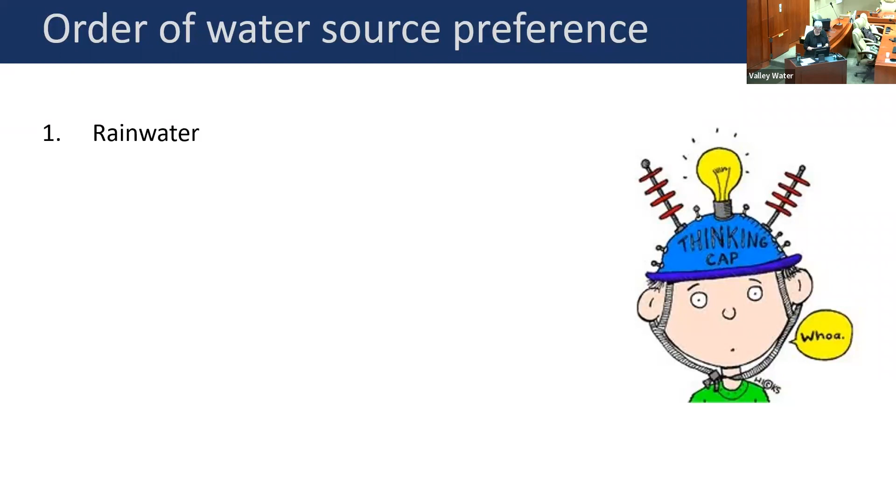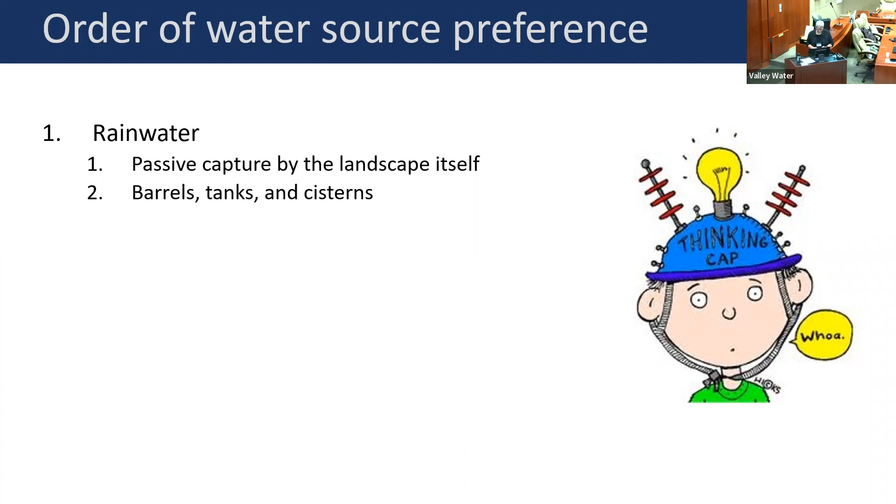Using the landscape itself to capture the water passively, and/or using barrels, tanks, and cisterns. Then our next option after rainfall—oops, hello, well these were supposed to come in one by one, but they've just eked out through the door. So the next one after rainfall, we consider rainfall first.

And then once that water's all gone, we consider recovered water from the house or the structure on the property. This would be repurposed water from the house—I know we're talking to mostly landscape professionals here, but if I were talking to homeowners, I'd say collect that warm-up water in bowls and buckets and take it outside to water plants with it. But you can also install a greywater system, or have recycled water piped in from the water purveyor, the sanitary district, or the city. And then the last resort is to use potable water.

So it's not—we're turning this whole paradigm on its head of what we're used to doing. We just turn on the tap and there's the irrigation, all right? So I'm asking you to think about it in a different order now.

And that potable water is whether it's piped in by the public water system or a well on the property.

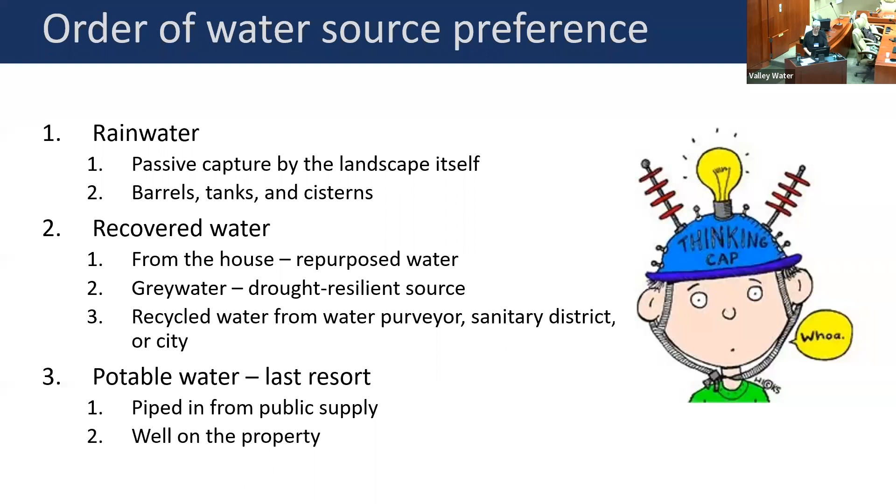So with rain and plant water requirement, they're both measured in inches, which makes it easy to put them both onto a bar chart and compare them. I don't know if you've ever seen anything like this before, but once I started doing this, I thought, wow, this is so cool.

I live in Richmond, California, and ever since 2007 I've monitored practically every drop of rain that falls anywhere near me. I do that because I'm a landscape water manager, or I was for many years. I see Chad smiling and nodding back there—he's a water manager also. So I tracked the annual rainfall from 2007 to 2021. Actually 2022's water year could be on here, but it's not, and it's right about the same as 2021 was.

So what I did was put the inches of rainfall there, and then I superimposed the plant water requirement for high water, moderate water, and low water plants—their inches of plant water requirement.

And then that purple line beneath the green line, that low water with mulch, comes from a study done at Texas A&M University where they found that just 1 inch of mulch spread over a landscape area lowers the plant water requirement by 25%. This is big, and I've even heard bigger numbers than that. I think 25% is very reasonable, and it feels a little low to me, but it makes me feel more comfortable to say yes, 1 inch of mulch will lower the plant water requirement by 25%.

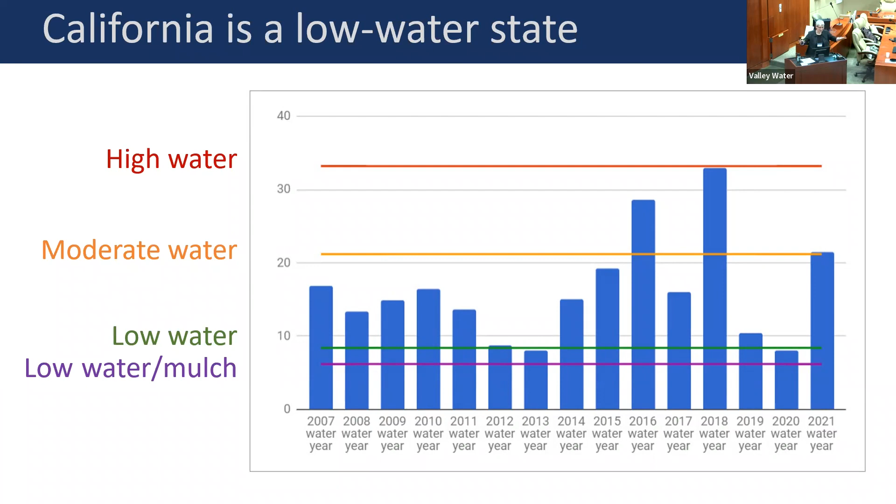So if we are going to go into the future and use less water, we need to use low water plants in our landscape.

All right, so here I've done the same thing, only I've plotted it out over the course of 12 months instead of 15 years. Hey, good one back there—I hate when that happens.

So I've plotted it out from January through December, and it's the same thing. These are historical rainfall totals from a website called usclimatedata.com, and this is historical rainfall for San Jose, California for January through December. Then I plotted on there the high, moderate, and low water use plants in this area. So there are a few things I'd like to point out about this.

If we look at the high water plant water requirement first, we can see that only in November, December, January, and February would rainfall take care of high water plants. So that's only 4 months out of the year.

For moderate water plants, we have November, December, January, February, and March—so we've got 5 months out of the year.

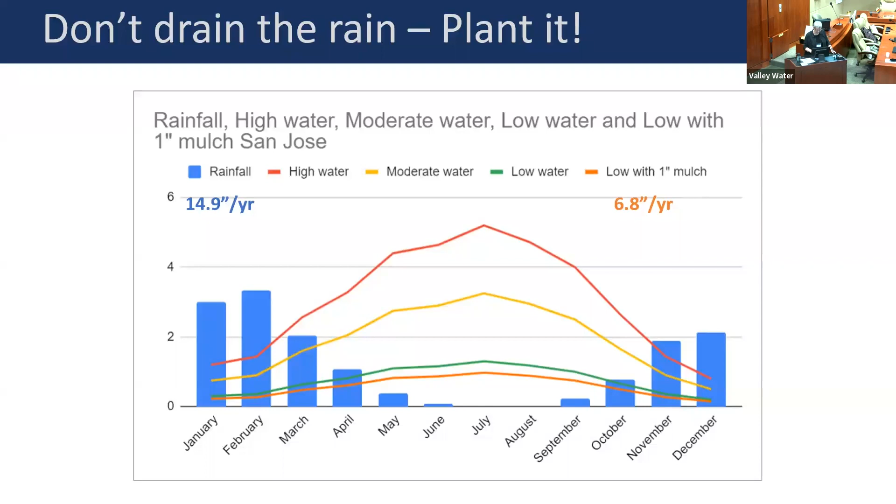Then we move on to that next option, which is greywater from the house or structure. Alan will be talking about this in his talk after mine, and Peter will be talking about stormwater as well. All right, so then the next one here.

Now, with this slide, I wanted to show you that it's pretty much the same story even if you go south of San Jose. It's an even better story when you go north of San Jose. But when you start traveling south, it's pretty much the same story. So I've taken 4 different cities here and did the same plotting: Merced, Riverside, San Diego, and Palm Springs.

At the top left, I have the average inches of rainfall per year. And at the top right for each city is the average annual water use requirement of low water plants.

Now, what I found when I started plotting these—and I've done about close to 20 of these around California—is that if the annual historical rainfall in inches is higher than the plant water requirement in inches, then in those places, they can leverage that free water that falls from the sky well into the summer. In some places, it's all the way through the summer.

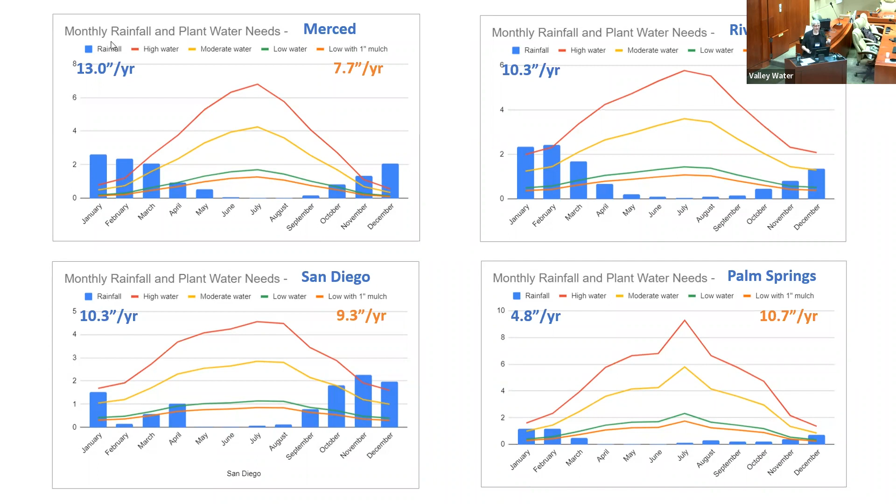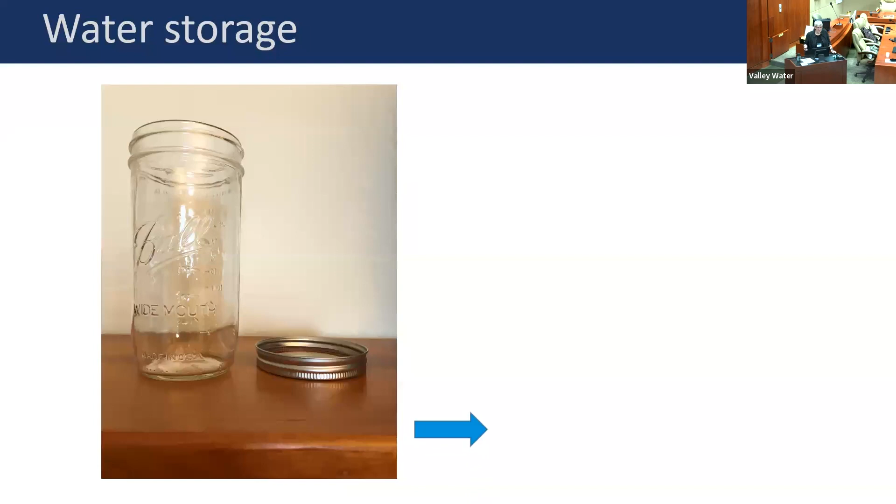Well, when you want to store water, or any liquid for that matter, what you do is you get a container. In this case it's a jar, and the jar has a lid. So you take that jar, pour water in it, put the lid on the top, and you are storing water, okay? You put a lid on it.

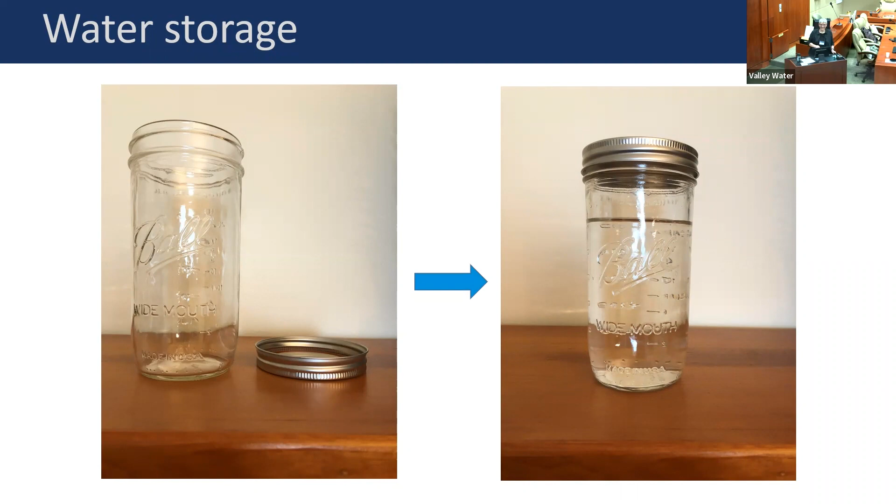Well, my friends, mulch is the lid of the landscape. I'm going to repeat that: mulch is the lid on the landscape. Now remember, I told you that mulch cuts down on or lowers the plant water requirement by 25%. So that is the way to hold it in for much longer and make it last as far into the summer, or through the summer.

As you're going to find out from Peter, we don't really just take that roof water and send it right out to the storm drain as quickly as possible, like we used to. We need that water in the landscape. We want to create a living sponge of our landscape and hold on to that water. So we can do really aesthetically pleasing things with the landscape itself to hold on to the water, like dry stream beds, rain gardens, and swales, etc.

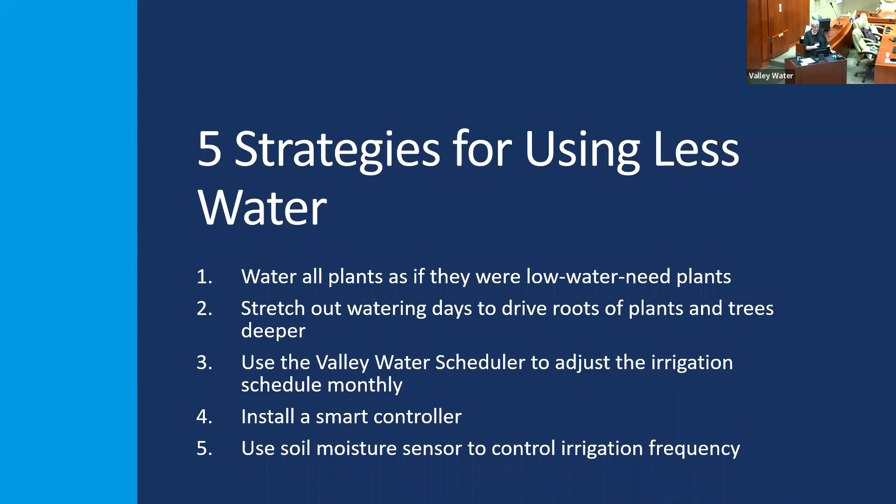So here we go. Now, water all plants as low water plants. This is my mom's front yard. When I planted this for her, I wasn't a water efficient landscaper yet, I was a pretty plant landscaper. So I put in all the pretty plants I could find out there in Rio Vista, California, ones that could take the really harsh, brutal wind they get out there almost 24/7.

So this is... let me see that, because you have to give the area... yeah. In this suggestion, this strategy, what I would say is to take this whole area, and this is an irrigation zone that we have here.

If you're using the most efficient irrigation we have, it's drip. And the most efficient drip is line source drip or grids, because it waters 100% of the soil. So if you were watering this, or even if you were using sprinklers—which you really shouldn't be using on planted areas, and in fact you can't do that per our landscape ordinance...

If you're watering it uniformly, you'd have to water to the higher water use plant in this irrigation zone. This is a really common scenario, where we have low and moderate water plants mixed. The moderate water plants are getting watered properly, they're happy. But then the low water plants are getting twice the amount of water they require. FYI, in case you don't know, moderate water plants need half the amount of water that high water plants need, and low water plants need a quarter the amount that high water plants need. So this is very much not recommended.

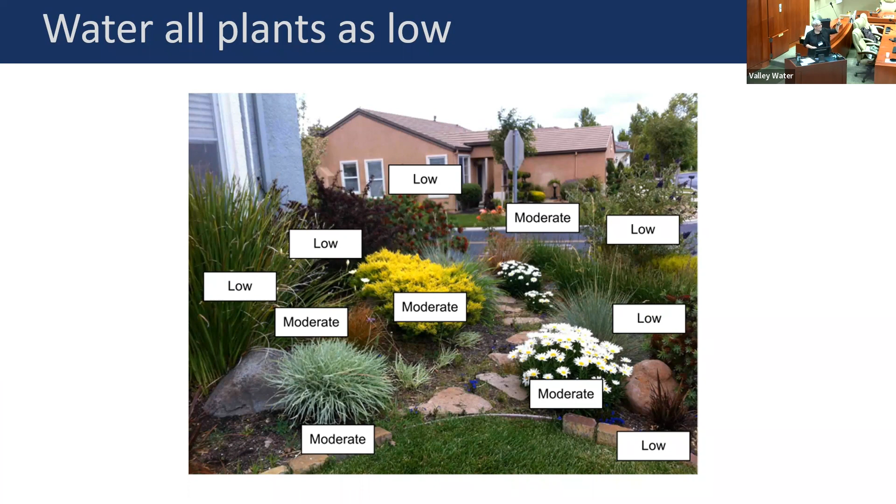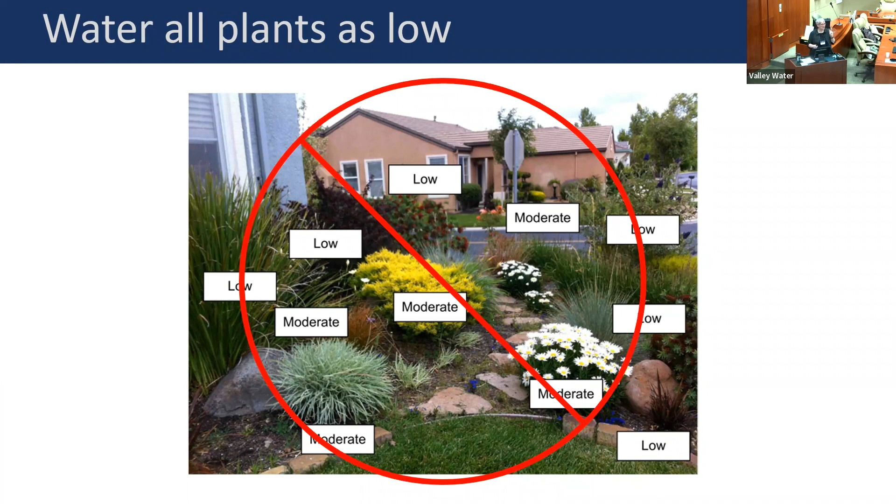So in this case, with this strategy, I would recommend running this irrigation zone as low water plants. Oh, and by the way, don't do this—we don't want our irrigation zones to have 2 water uses, and especially not 3.

So how much water do plants need anyway? Do you know how much water plants need? If you and I were standing in front of a street tree that you planted 2 years ago, and I asked you how much water this tree needs per week, would you know? No, you wouldn't. We don't know how much water anything needs, because it depends on what city you're in, it depends on the size of the plant, whether it's low, moderate, or high water use, and the square footage of the planted area. There are many elements that go into determining how much water anything needs in terms of gallons.

So I developed this app here. A lot of you know that I'm an irrigation geek and a technology geek. I develop apps—I've developed about 23 of them now, apps and websites that are out there in public. And this is one of them.

With this one, for any plant in any incorporated city in California, in any time frame, any plant material, and various sizes of plants and planted areas, you can look up how many gallons that plant needs—because sometimes we have to water things by hand. If you're counseling homeowners to use water from the house, like their warm-up water, they need to know how many gallons a week that street tree needs if they're going to water it by hand. So this is one way to know that.

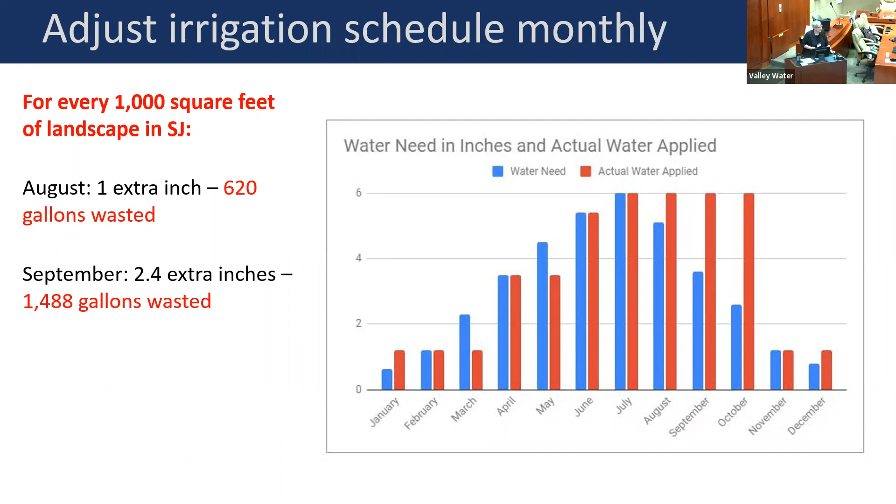So how much water are we even talking about? In San Jose, California, for every 1,000 square feet of landscape with this scheduling practice: in August it's an extra inch, 620 gallons wasted; in September, 2.4 extra inches, 1,488 gallons wasted; and in October, 3.5 inches, 2,170 gallons wasted — a total of 4,278 gallons wasted over these three months. Remember, this is just 1,000 square feet in somebody's yard.

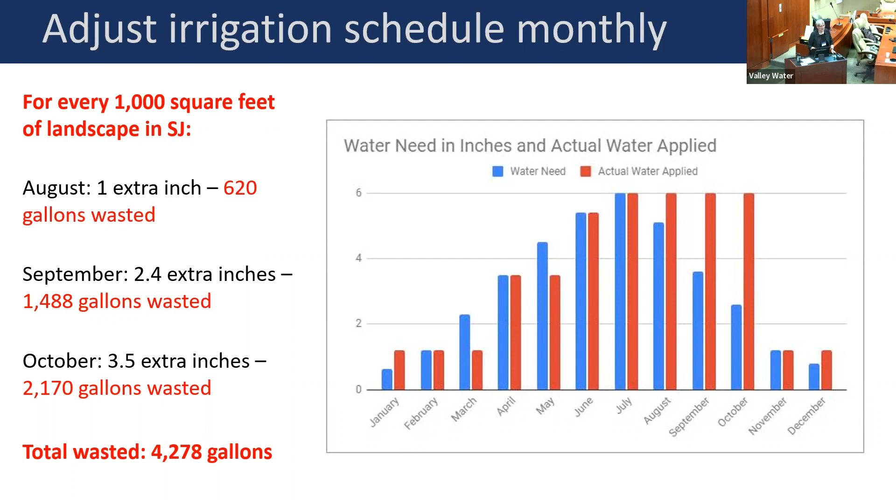What happens when that goes out to blocks, neighborhoods, and cities? This compounds itself, so it's really very important to change your irrigation schedule monthly at the very least.

The last strategy I have is to use soil moisture sensors. The biggest irrigation manufacturers whose components we use in the Bay Area — Rain Bird, Hunter, and Toro — all have a soil moisture sensor you can hook up to any controller, not just that brand. What it does is deny irrigation from happening until the soil is dry enough to need it.

So what I like to recommend is that if you don't have experience with any of these, install one at your house so you can see how it works and get a feel for it. A big light bulb moment will go off in your head: oh my gosh, water stays in the soil way longer than I thought it would.

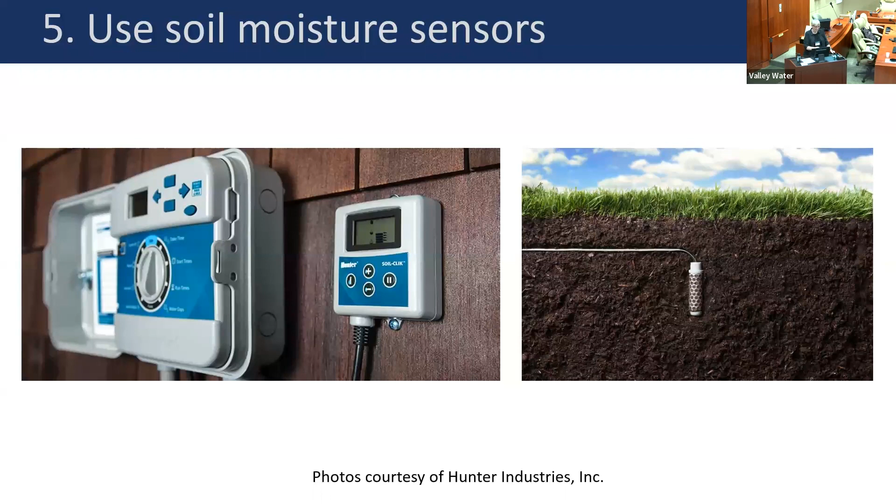Okay, so this would give you an education. And if you hook it up to your controllers, let it deny the irrigation from happening unless irrigation is needed by the soil, because we're watering the soil, not the plants. When the soil says, hey, I'm dry enough and allows the irrigation, then we allow the irrigation. So just a little tiny closing here: I hope I've filled your head with lots of great ideas and inspired a mindset that propels you to create and maintain landscapes that use very little water.

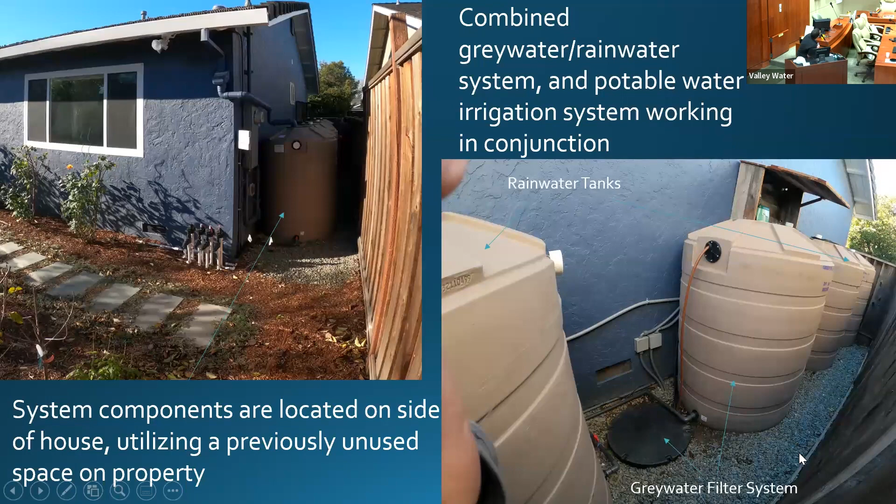So basically here's our little, the 2 bathrooms, and they're collecting water from showers and sinks and our laundry machine, and they're flowing to the tank, which you saw in this picture earlier. So this is that tank that's in the schematic, and all the fixtures are flowing to that tank on the side of the house.

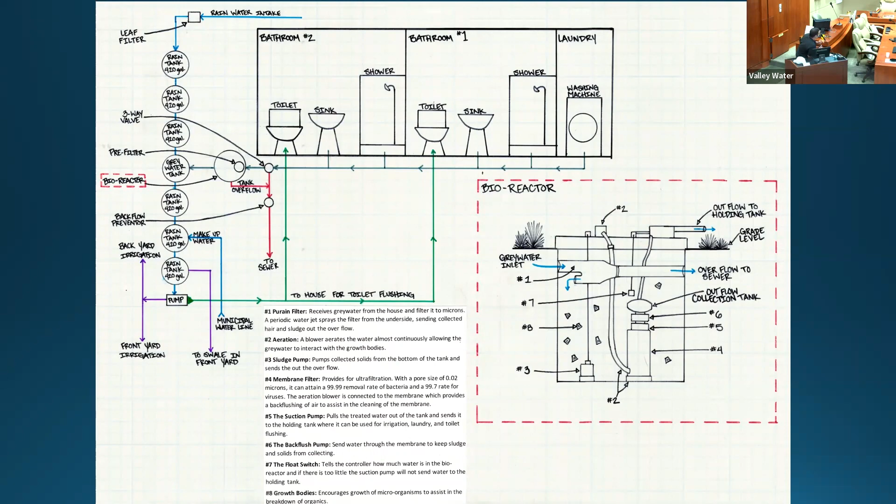This is kind of the brains of the system. This is where the filter and the pump are located. And once the water is filtered, I'm going to jump around the slides a lot. I do apologize, but there's a lot of information to cover, so I'm trying to do my best to convey without using too much jargon here. Let me get to the next slide.

Okay, so here is the actual schematic of that tank. In that tank, the water will flow from those bathrooms. It's going to go through this little pre-filter, and then it will sit in the tank. This is where our pump and secondary membrane filter are located.

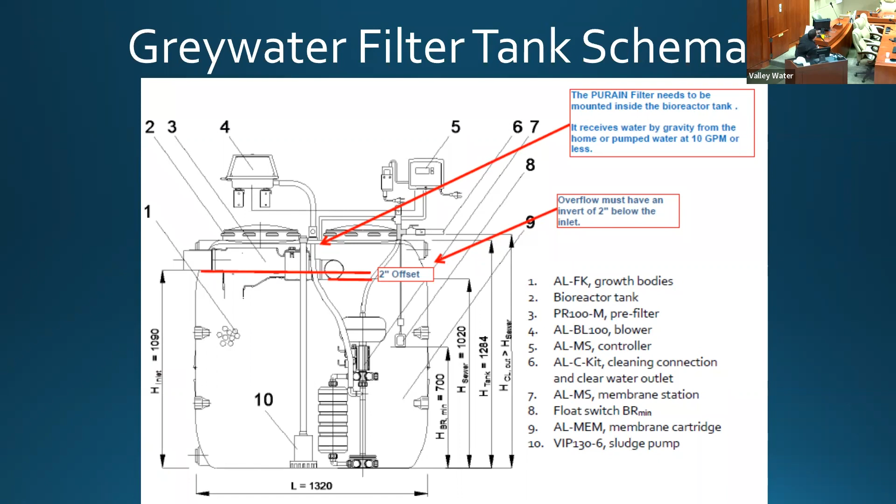And so the way this system works, you have three stages of filtration.

So the first stage is our Purain pre-filter. This is designed to catch the largest debris, hair, shaving stubble, shaving cream, toothpaste. Those are some of the biggest things that get caught up in your filter for a greywater system. So this is going to catch that larger debris, that kind of gunk. If you've ever seen a greywater tank, they get kind of funky.

This is what gets that initial debris out of the system. Once it's gone through the Purain filter, the water will fall down this little section right here and then drop into the tank. So this side is our inlet.

This is our check valve. What the check valve does, if there's ever a sewer blockage further down the line from the street, the sewage water can't flow back into your greywater tank. And so this little check valve has a little access port on top. Once it goes through the filter, it's going to come down the vertical outlet and into your tank. That's our first step in this process.

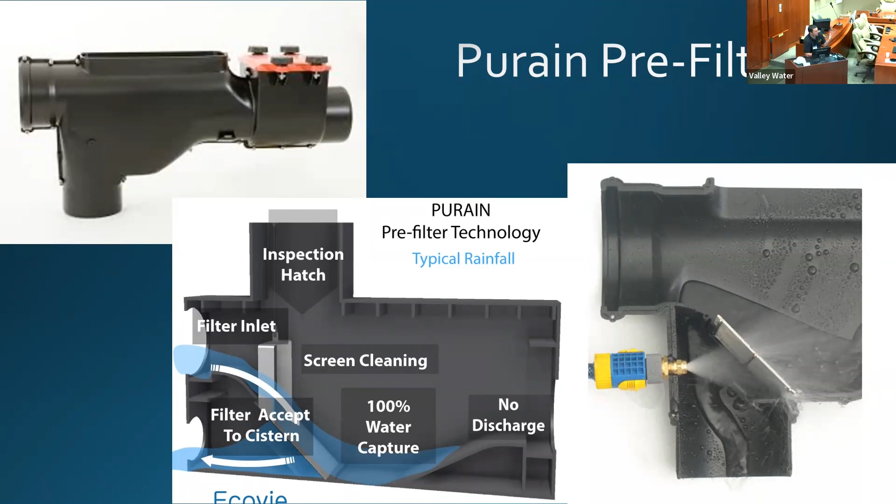So the secondary process is our membrane filter. This filter is going to catch all the smaller debris, basically small organic matter, whatever's in the soap product you're using. And once it goes through the membrane filter...

So the actual tank itself is a 35-gallon tank, made out of polyethylene. It's 18-inch diameter and 30 inches deep, basically the size of a small garbage can.

And if you look at this little media here on the side, these are basically little plastic balls, and they are designed to house the beneficial microbes. Those beneficial microbes are what's going to break down the final layer of organic material inside the greywater. And you can see there's kind of little bubbles in here.

The system has a pump that basically pumps oxygen into this tank. So the oxygen is what's keeping all those beneficial microbes alive, and those microbes are able to break down the greywater material.

If any of you have ever been next to a greywater tank or any kind of sewage, even opened up a 2-inch drain on this, they get disgusting really quickly. So the oxygen is what keeps the tank aerobic, not letting it go anaerobic, and it allows the microbes to do their job and break down the greywater.

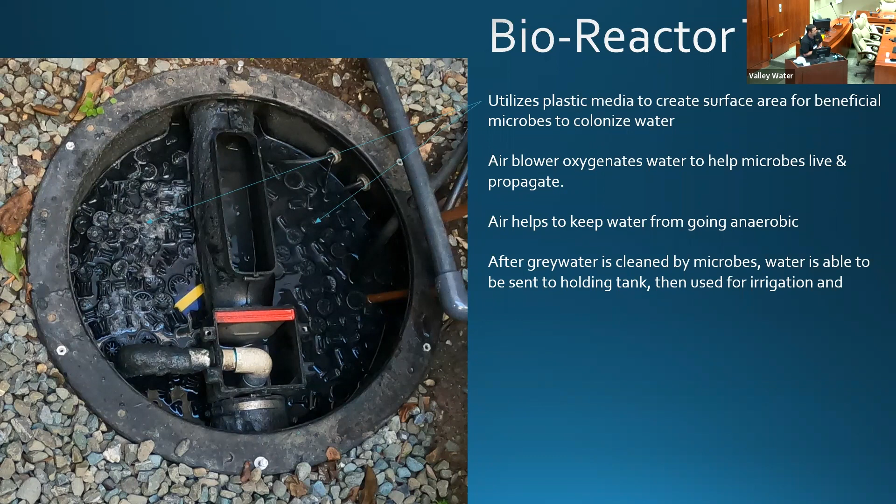So yeah, so here's, once it's gone through the filter, actually, let me go back one slide. Maybe it's one more slide forward. Where do I have? I thought I had. I'm so sorry.

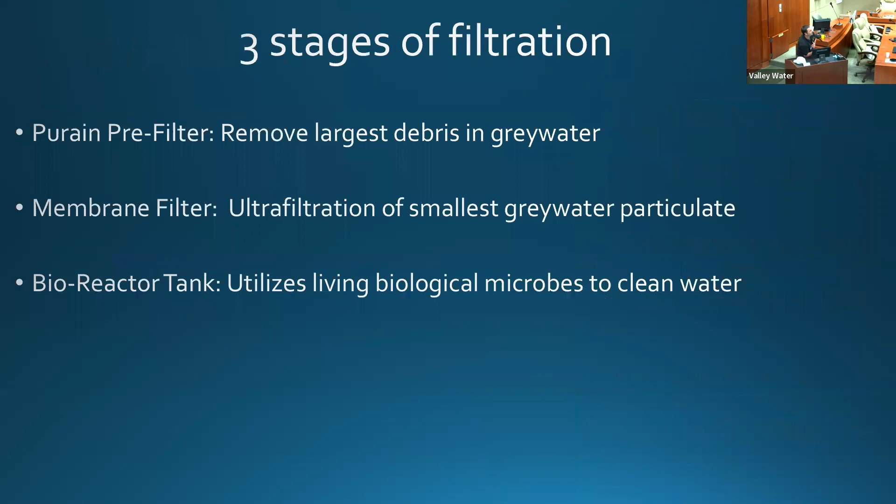Okay, so let me go back here. So the water will come from the house right through here.

It's a buried 2-inch ABS pipe coming from the bathroom, showers and laundry. Once it goes through this bioreactor, you can see right here this little yellow guy, there's a float switch that tells the controller when the water is full and to send it out to the storage tank. This little brown pipe is the outlet pipe from the pump at the bottom.

Once it's had a chance to sit in the tank for 24 hours, that's enough time for the biological activity to happen, and the water is now clean enough to be stored. Then it sends that water via this half-inch line.

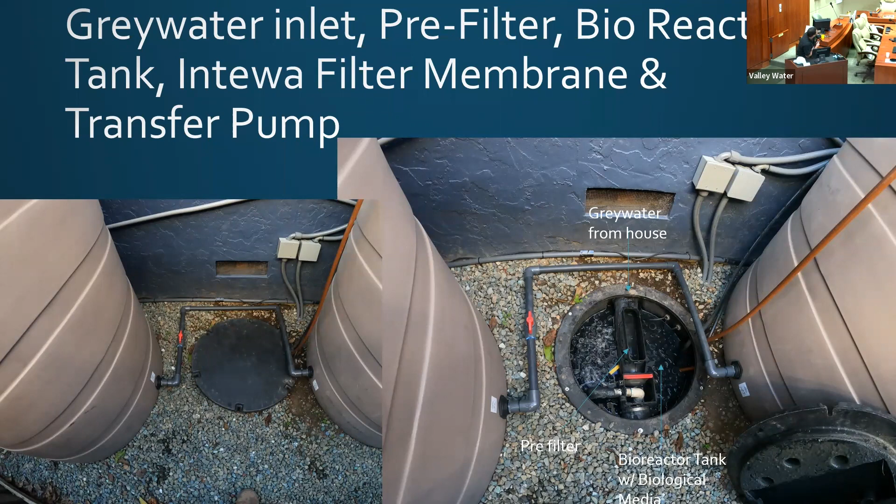It's actually a blank Netafim line, so it's got some flex to it, which makes it easier to install. Once it's gone through the filtration, it can now be stored in these 420 gallon Bushman tanks. That's this guy right here.

This particular project had 6 Bushman tanks on the side of the house, 5 of them for rainwater storage, and 1 for greywater storage.

In most cases, you would never be able to store this greywater—that water would go anaerobic basically overnight. So this is one of the benefits of doing this: it allows you to really fine tune your irrigation schedule.

Most greywater systems have an irrigation schedule dependent on when greywater is available, so in most instances, every time you take a shower or run laundry, that's when you're irrigating your landscape. Being able to store it, you could run your irrigation based on whatever water-efficient irrigation techniques, like some of the ones Lori was mentioning. So you have the flexibility of when and how long you water by being able to store it. This really opens up a ton of options for how you can use greywater.

Based on the amount of space and people in the home, you could have a larger or smaller tank. So you kind of size it based on the water being produced.

In this instance, they have a family of 4—2 of the kids are there part-time and come and go, so they're not there full-time. If it were 4 permanent household members, I would maybe go to a 600 or 800 gallon tank. So every case is going to be a little different depending on space and occupants.

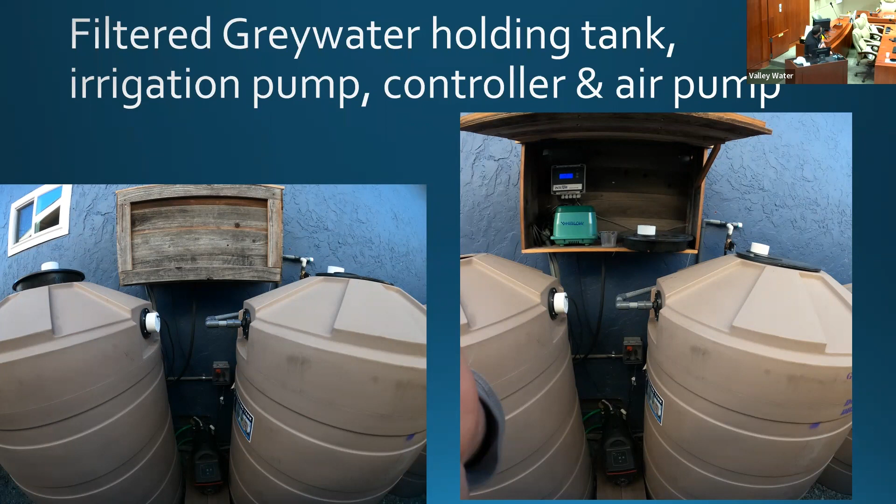Okay, so let's go to the next slide.

Here's just a close-up of the controller, and you can go through a bunch of different options that tell you what the water flow is, what your irrigation usage is, if the float meter is reading properly, if the potable water connection is active. So this is just giving you up-to-date stats on what's happening in the system.

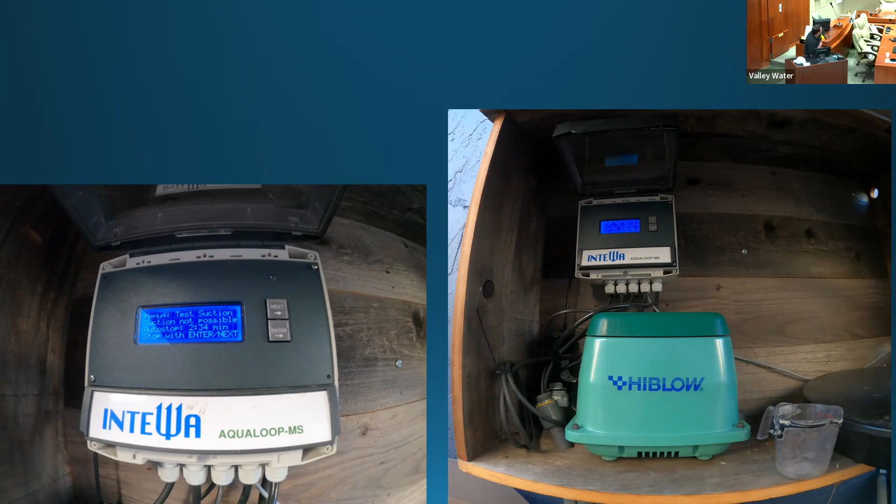This part is our on-demand pump—a 1/2 horsepower Grundfos on-demand pump. What this pump does is its goal is to always hold the water line under pressure, and it will only kick on when it notices an irrigation valve turn on.

What's good about this particular pump is it doesn't require a bunch of additional sensors mounted inside the tank to tell it when it needs water. It's a very advanced pump, but it runs in a very simple fashion—it just monitors when there's a drop in pressure. Every time an irrigation valve kicks on, this pump will turn on and send water out to the landscape based on the Hunter controller. This particular project uses a Hunter controller.

This is going to send water to our indoor non-potable system, for toilet flushing and for laundry. You can see right here this is a 1/2-inch PEX line, and that line is plumbed to 2 toilets indoors and also for the laundry.

Even though this system can be used for laundry, I wasn't able to convince the client to have enough confidence in the system to wash their laundry with it. I'm hoping as they see the system used long enough, they'll have more confidence. But that's okay—there's always a process to getting people to adopt these systems. It is an option you can use for laundry usage.

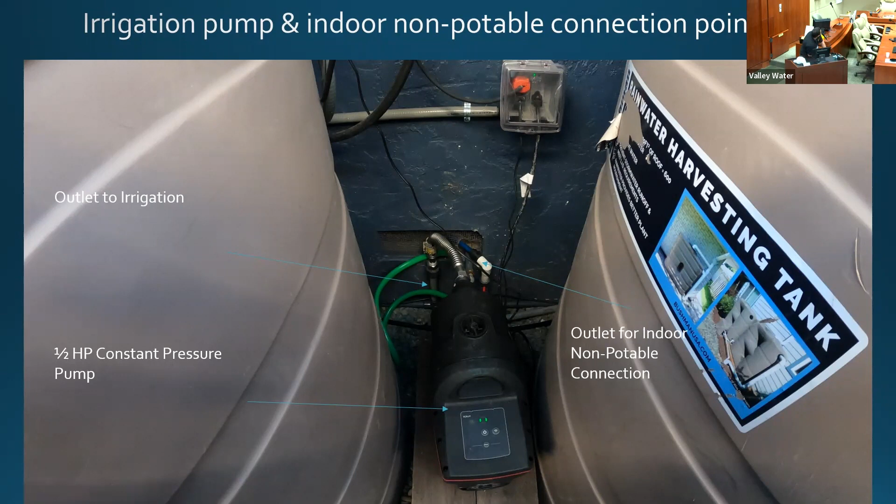So if there were ever an incident where there's no power, the pump wouldn't work outside and you wouldn't be able to flush your toilets. If that scenario ever happened, you can simply unplug the line coming from the greywater system and plug it back into the municipal supply. So you're never going to be left without the ability to flush a toilet—it's kind of a little backup supply.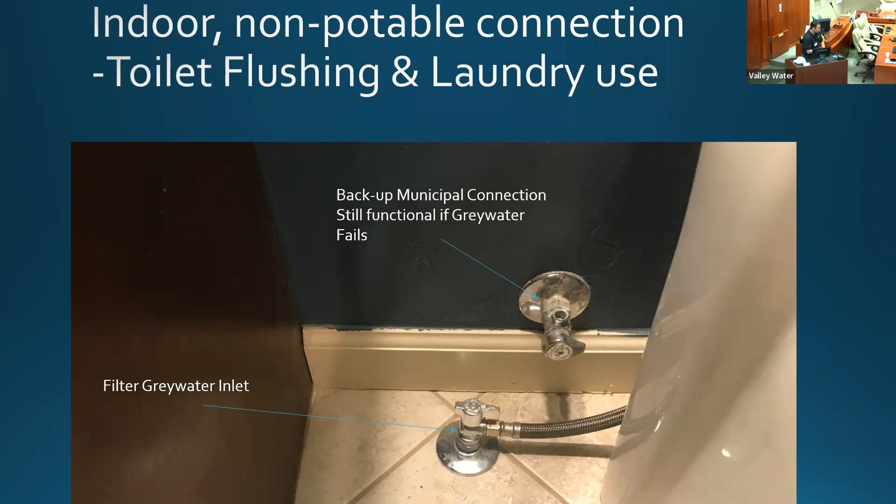So basically the whole system is always going to still be dependent on that one pump. Whenever there's a lack of water, it'll fill up—there's always one tank which is sort of our working tank, and that's what's always controlling the water to the irrigation. So if there's a lack of water, it'll fill up the tank just high enough to satisfy one irrigation cycle, adding anywhere from 100 to 200 gallons, then turn off and wait until there's either gray water, or if there's still not gray water being produced, it'll rely back on the potable water.

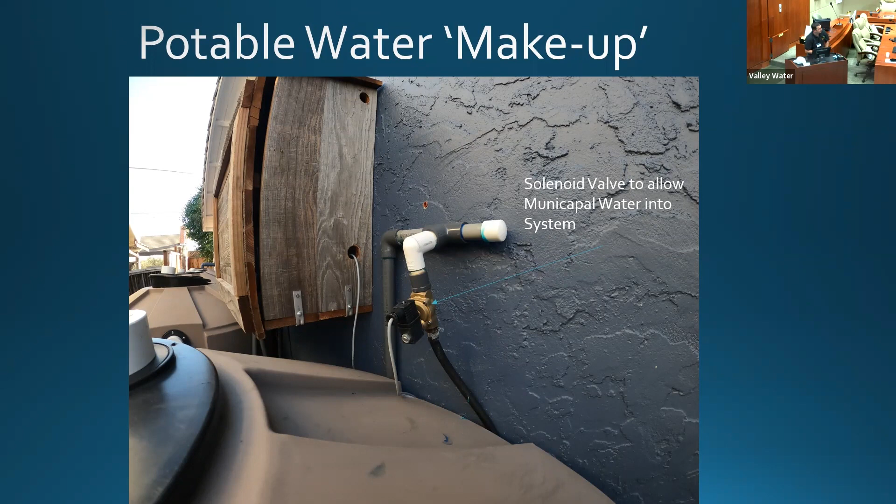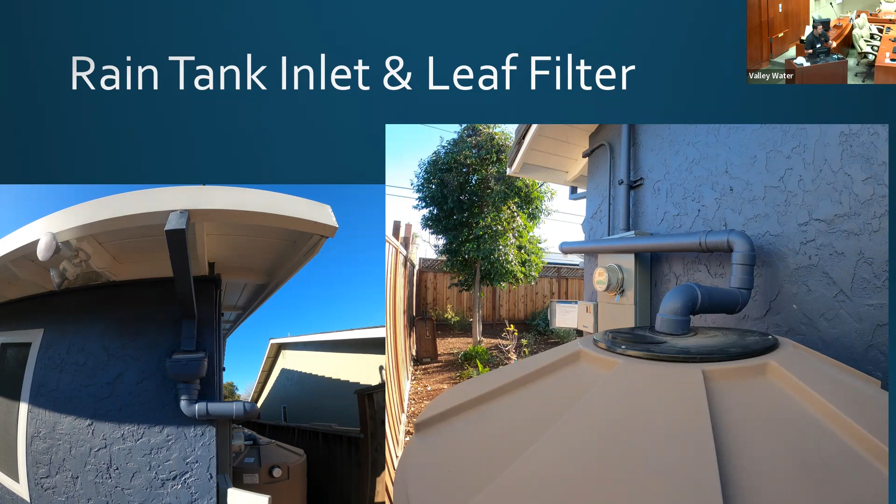I'm sure everyone's probably seen these—this is just where the rainwater connection is. The way this system works, it's always going to take gray water first as its priority for water usage, just because it's being produced daily, so it's always going to want to catch and use that water first. Since rainwater is more intermittent, it'll use rainwater as a secondary source, and third will be potable. So it's kind of the hierarchy of water use for this system.

The beauty of this system—I'm not sure how much experience everyone has with different manufactured gray water systems out there, but I think one of the biggest challenges is so many of the products are proprietary products or proprietary controllers. They're one-off systems, so every time you install one you have to use their product, and there's not a lot of uniformity. If there's a problem with the system, it's hard to get parts, and they're expensive. The beauty of this system is you can use a lot of off-the-shelf parts that you can find at any landscape supply store, so I think that's a really big plus to this kind of system.

This particular system runs off just a simple Hunter Pro-HC controller with a Hydrawise configuration. I think the more off-the-shelf parts you can use, the bigger selling point it's going to be to your homeowners.

One, it keeps costs down, and it's easier for them to replace. Many times when we put these systems in, we do maintenance, sometimes they have someone else doing the maintenance. So if I can make the system easier for whoever's doing the maintenance to understand and use, it's just a plus.

This garden runs off of just a simple Netafim Techline RW for reclaimed water. You don't need to use this, you could use a simple Techline CV. We went with the RW just because it has the purple stripe, just to make sure it's clear to anyone in the future to know that this system is running a greywater system. But you could use any Netafim product or any inline type drip product, a Hunter or Rainbird would work just as well.

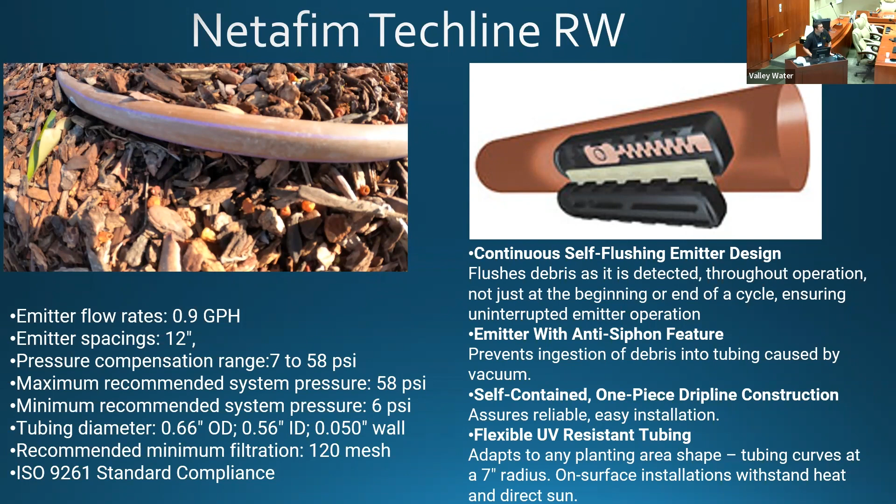So some of the benefits of this system, the main maintenance is cleaning out the little membrane filter. I know it's funny because this is like a high-tech system and the filter just looks like a ball of yarn wrapped around a piece of metal. But the beauty of this is it creates as many surface areas as possible to catch that grey water, so even though it looks like a homemade setup, it actually works fantastically well.

The maintenance on this really depends on how many people are living in a house. I always say there's a 1-to-1 ratio of length of hair to how often it needs to be cleaned, and that's not a slight on long hair, I used to have long hair myself, but the longer the hair, the more this thing gets caught up with things. So maybe a 2 to 3 month kind of time period between washing this. You can just pull it out, use it with a simple power washer, wash it every once in a while. You want to do like a bleach dunk to really get some of that grime off there. But besides that, that's sort of the extent of the maintenance of the system.

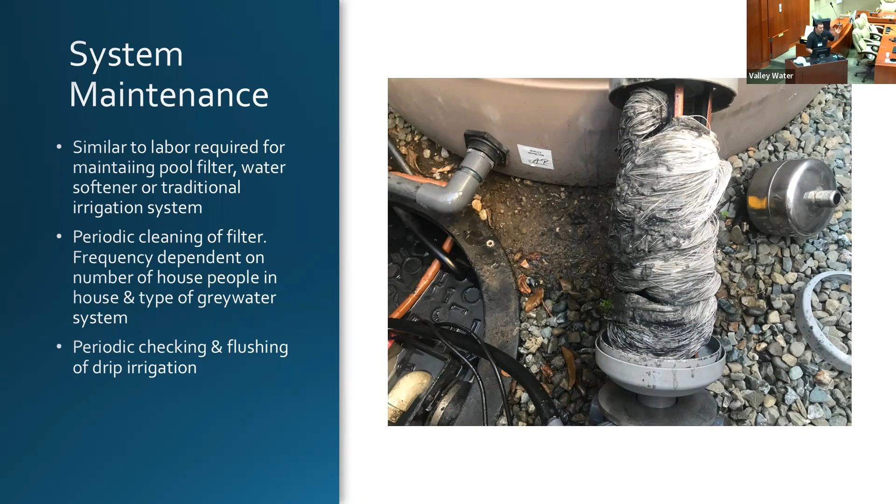So really to maintain the system, it doesn't take any advanced training or much experience. I really wanted to get more people feeling comfortable selling these concepts to their clients, because a lot of people worry about the maintenance side, but the maintenance is quite low and quite simple.

Some of the benefits with this - I really can't stress this enough - when people call me asking about grey water systems, they're really excited about doing the grey water portion of it. And then I give them the cost of doing the grey water system, and they realize a big part of it is basically having to change so much of your irrigation. Most traditional pumped-style grey water systems require you to run all subsurface drip irrigation, and in many instances that requires them to rip up their existing system and their plants - not always, but in many cases, especially for people who really want to keep their lawn.

There are grey water systems where you can use subsurface irrigation for the lawn, and people are really excited about that, but the challenge is putting subsurface irrigation on an existing lawn means you have to remove the lawn, put the subsurface irrigation in, and reinstall the lawn. So for most people, that cost is just not worth it to them.

So if I can put this grey water system in, and they really want to keep that lawn, they can do this without having to rip it all up. It really keeps some of the landscape costs down. In many instances, the landscape and irrigation component of a grey water system can be just as expensive as the actual grey water plumbing work, so this really helps give a more financial incentive to people - a really big bonus. And also the larger use of grey water - not only can you use it for irrigation, but if you can use it for indoor non-potable uses too, I think that's a big plus.

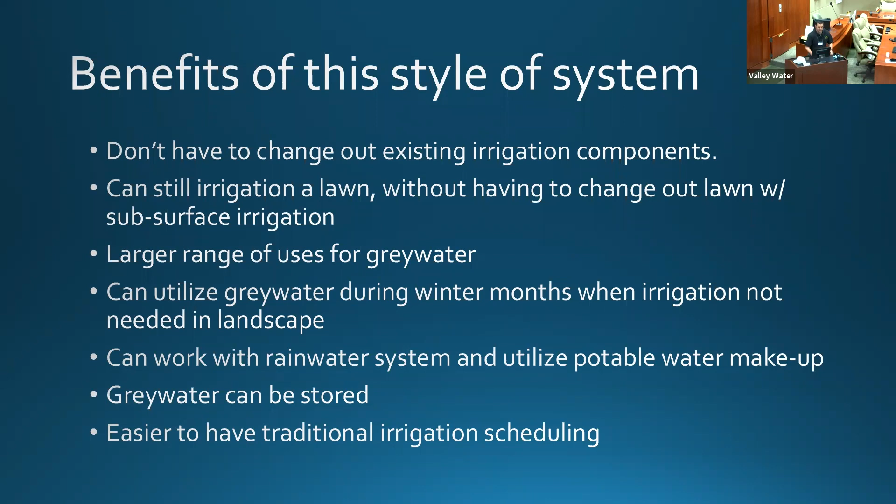If you're trying to get a potential customer, yourself, or a friend to adopt these systems, my advice is it's always important to find out if they create enough gray water to make it worth it. Lots of times, maybe empty nesters or people without kids, the available water they're producing doesn't make sense for a gray water system.

If there's not enough gray water being produced, I really focus my energy on doing a rainwater system instead. Also check the plumbing—a lot of times if they're on a slab foundation or can't make grade, those things can affect it. So it's always good to assess whether they're even a good candidate for these kinds of systems.

The best time to do a gray water system is during major remodels or new construction, because all the pipes are available and much easier to access. You can leverage the fact that they're already getting permits, and a lot of times they're already getting financing from a bank for the modifications to redo the home. So you can piggyback some of those costs together. Those are really good ways to make the system more cost effective and easier to install. If you can time it that way, it's fantastic.

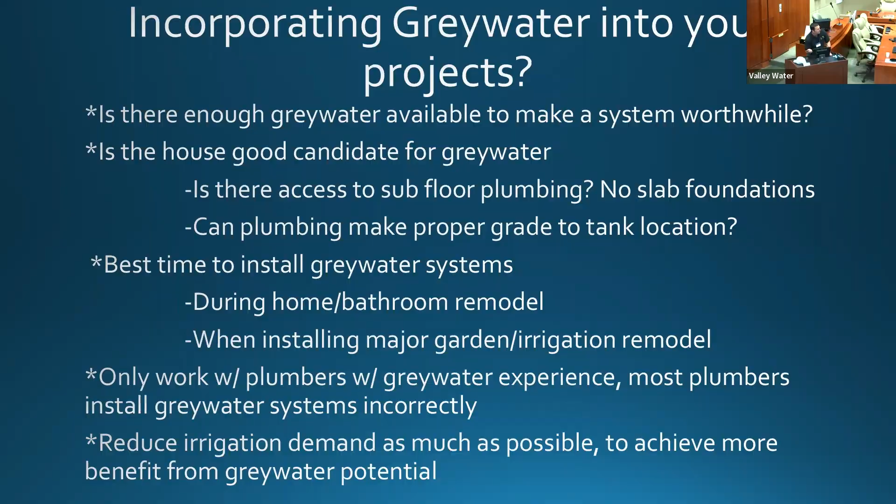Hi, what is the average cost of this kind of installation, and are there rebates for it?

Awesome. Right here—hi, a couple of questions. One, I saw that virtually everything we looked at was made of plastic, and unfortunately, in our neck of the woods, temperatures go down to the 20s and up to maybe 110. So I'm wondering what range that plastic can hold up to temperature-wise. And also, are there things you train the homeowner on, like what not to put down the drain?

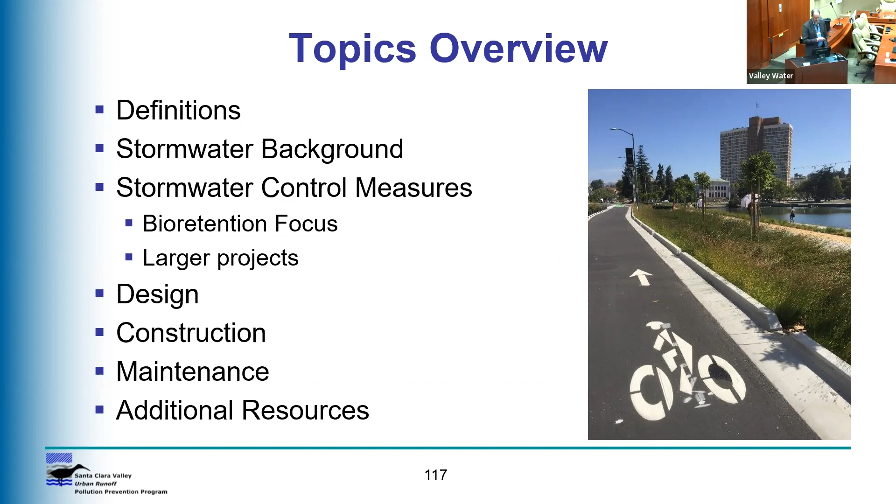So, definitions: gray infrastructure is kind of what we typically have in most cities, right? It's pipes and channels, it's concrete.

It doesn't allow for infiltration. It doesn't use plants. So we're trying to move away from that.

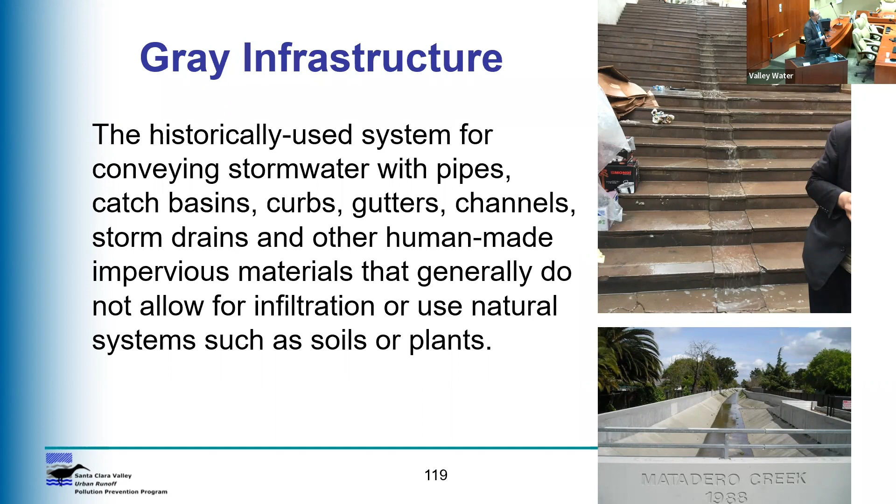And we want to use more green stormwater infrastructure. This is using natural systems, soil, plants, all different kinds of natural systems, infiltration into the ground. So those are the things we want to encourage and use.

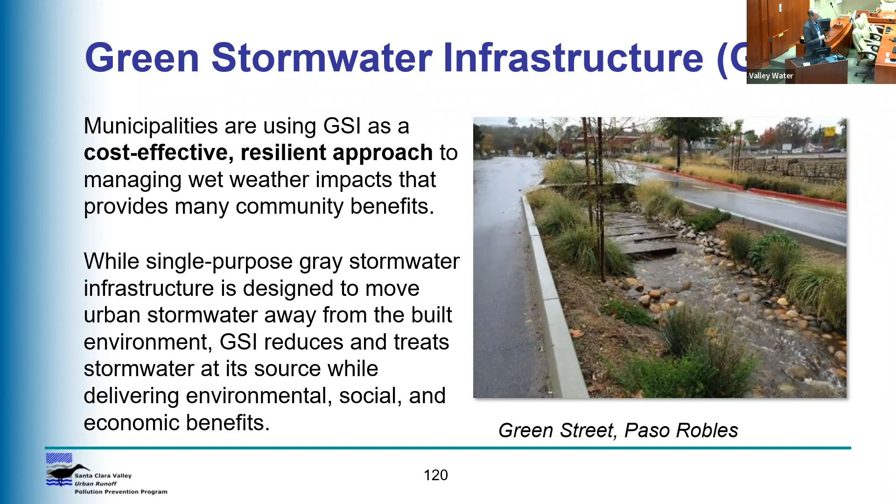And there's different subcategories of that. Low impact development is usually done on a parcel scale, like on a property. Sometimes people use these terms interchangeably, but at SCVWD we tend to say green infrastructure is the bigger category. It might be things in a street or in a parking lot, so you might have public systems like a green street, which we'll talk about. Whereas low impact development is maybe an older term, and it's usually talking about new and redevelopment projects that are regulated and have to do these types of natural systems that mimic nature on the site.

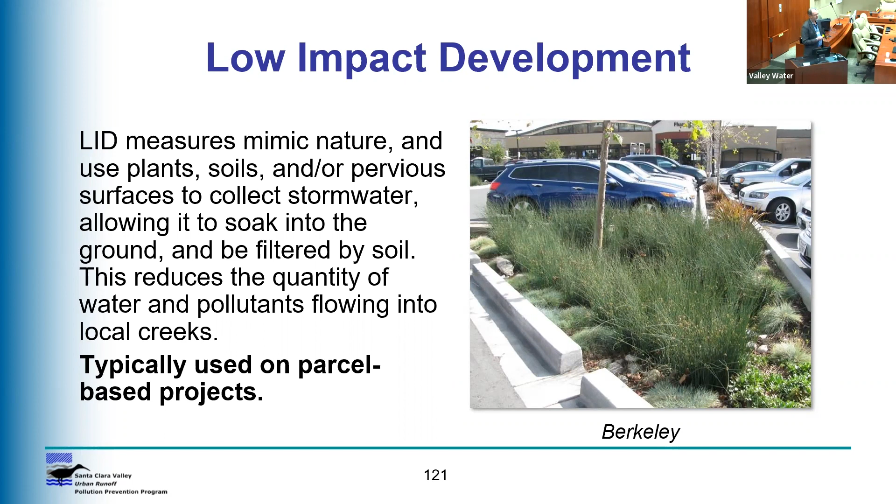And pervious pavement is another type that I didn't mention. I'll show you an example of that.

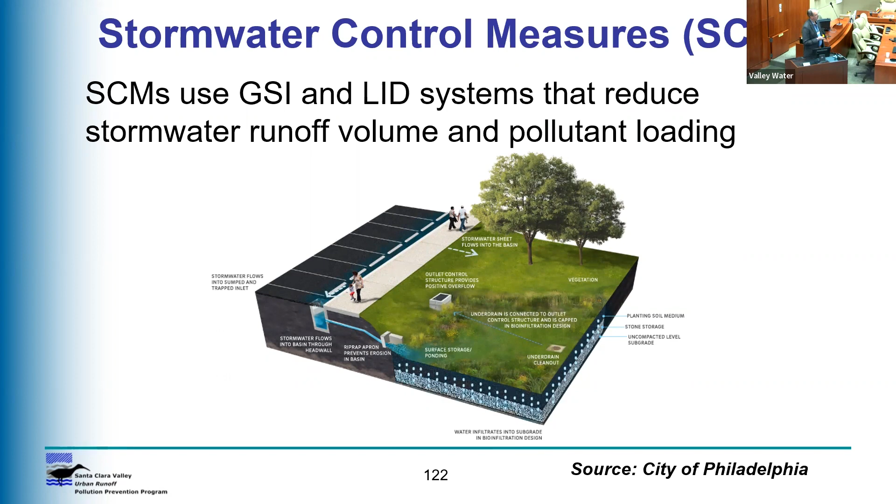So then you have the different types of stormwater control measures. This may be a little hard for you to see, but I think I have a closer up version later on. This picture I included because it's got all the different elements of what's in a bioretention type of stormwater control measure. Of course, there's a lot of acronyms in this field, like there is in every field, but I'll try to not use too much of those acronyms if I can.

So background, I wanted to include just a couple slides about why we care about this issue, about stormwater, what's the problem, and a little bit about the regulatory background.

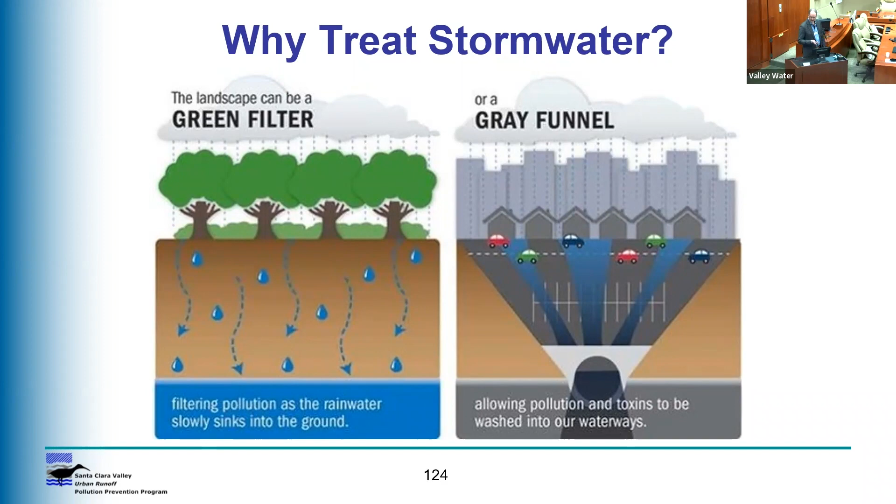Well, it seems like I have to click this several times sometimes. Point it that way. Okay, there we go. Maybe that was the problem.

Okay, so just one slide on the regulatory overview. You have the Clean Water Act, which is really what's causing, or the reason for, all this. That's from the federal level, and US EPA manages that. Then in California, it comes down to the state at the State Water Resources Control Board, and then you have these regional water boards. Those two agencies have different types of permits that they issue. I'm not going to go into a lot of detail about this, but in the Bay Area, we have a municipal regional permit for a lot of the jurisdictions. That comes down to the municipal level where they have to implement the stormwater program. So that's just a very basic overview.

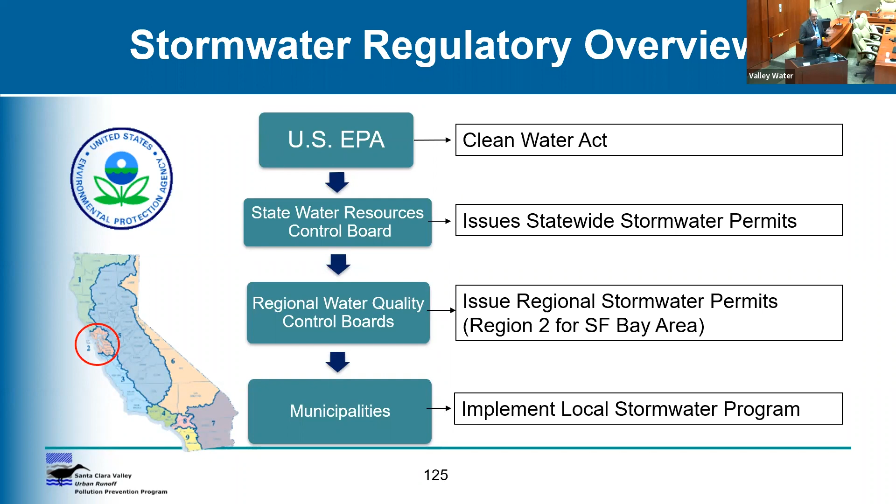We're in Region 2 here. I also wanted to mention the Water Efficient Landscape Ordinance that a lot of municipalities, cities and counties have to comply with. There's also, if you haven't heard about it, the Rescape Regenerative Landscaping Program, which is another great program run by a nonprofit organization, and there's a lot of great principles in there. As someone mentioned earlier, if you really want to do sustainable or regenerative landscaping correctly, you need to look at the whole system holistically. So it's a great program for that.

Okay, so now some different types of stormwater control measures and the locations for them. The locations really come down to three main categories. You have the streets or a green street project, you might have the parcel-based or property-based systems like the low impact development, and then you have these larger regional projects where you might have a really large area draining to a park or something like that, where you have even maybe an underground system that might be treating that runoff.

For regional projects, a quarter of an acre is kind of a threshold for that.

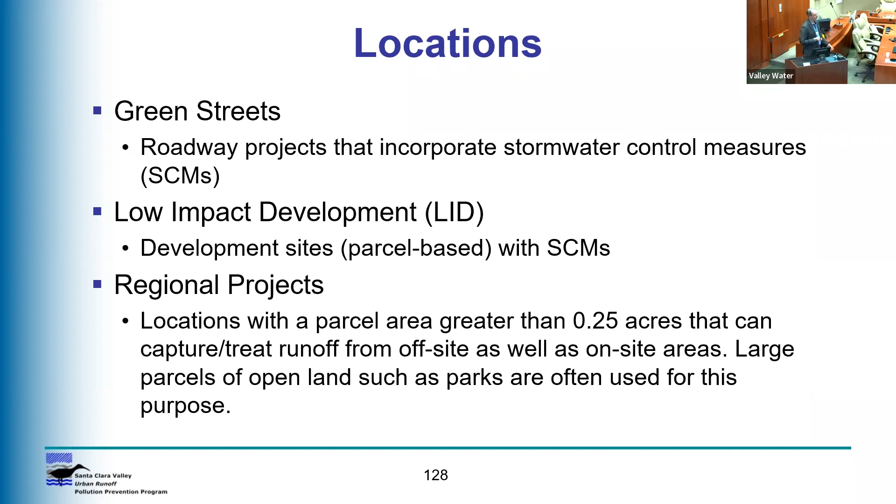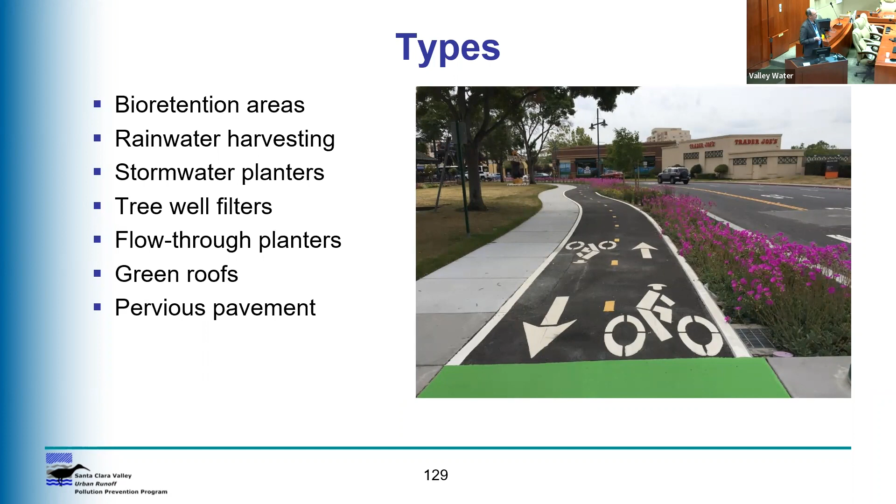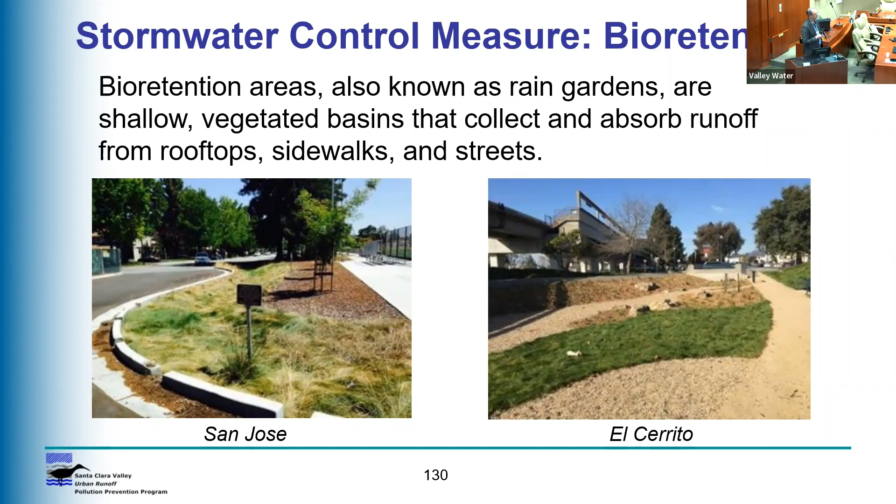So these are the different types. I'm not going to go through all of these today, but I have a few pictures to give you some examples. Bioretention is what I'm going to focus on today. Here's a couple examples - these can be all different shapes and sizes. Bioretention is kind of a catch-all.

You might have a green roof, or living roof - there's different terms for that, and a bunch of different types. Some have really thin media, and some are really thick, like a park basically. In Oakland, there's one that's up on a parking garage, and it looks like it has trees and water features - it looks like it's down on the ground, but it's up on top of a parking garage. This example is more of the lightweight one.

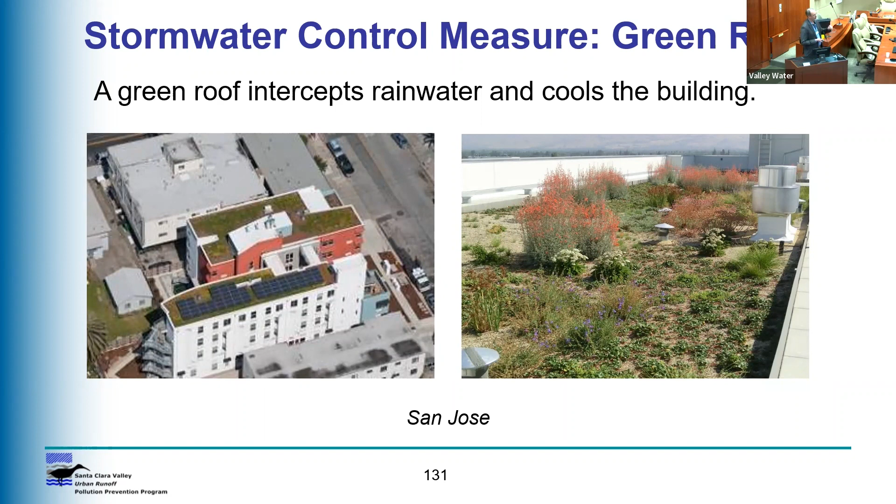Pervious pavement - I'm not going to really talk about much today, but I wanted to show you a couple examples, where you might have interlocking concrete pavers with water going through the joints between the pavers, or maybe through the paver itself. There's also pervious concrete that can be in a paver, or poured in place. So there's a lot of different types of pervious pavement.

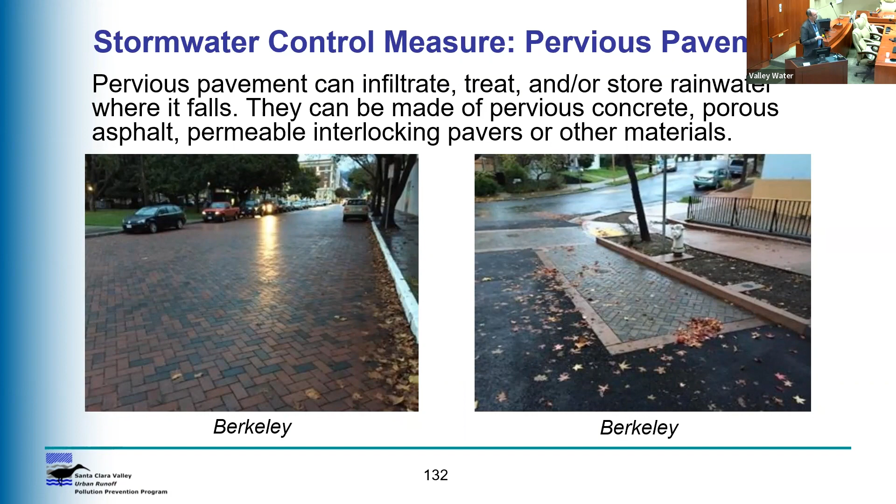Getting into bioretention, here's a good slide that shows some of the main aspects of a typical bioretention system. At the surface you might see that overflow inlet in the middle. Out in this parking lot, there's a bioretention system with a lot of these elements. Typically if it's in a parking lot or street, there'll be a curb with cuts in it so the water can get into the system.

It's a depressed type of landscaping, which is often one of the challenges, since grading is very important - you need to let the water get into the system. Sometimes that doesn't work out too well in construction; maybe the grading didn't turn out the way the designer thought.

Also, a lot of times you'll see the overflow not raised up like it should be. The construction company maybe thinks that was a mistake in the design and puts it flush with the ground, but it's actually supposed to be raised up, typically about 6 inches, so the water can pond and then sink into the ground over a day or less. If you lower that down, it doesn't really allow for that ponding - so sometimes we see that mistake.

There's usually also a pipe that sticks up, which is a clean-out pipe, in case you need to get down below and clean out the under-drain pipes shown here. In the Bay Area we have a lot of clay soils, so typically you have some kind of under-drain so the water doesn't pond for too long, because then you can get mosquitoes. So there's this engineering puzzle of what's the right amount of time for the water to sit - what's too long, what's too short.

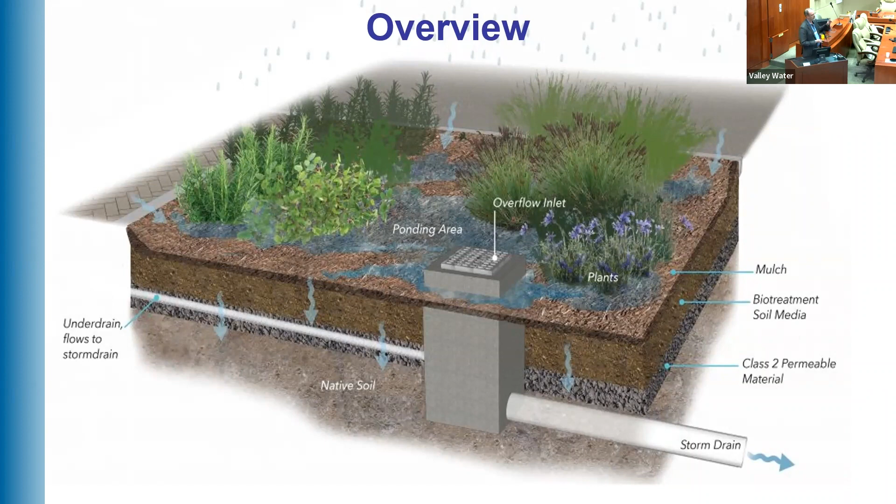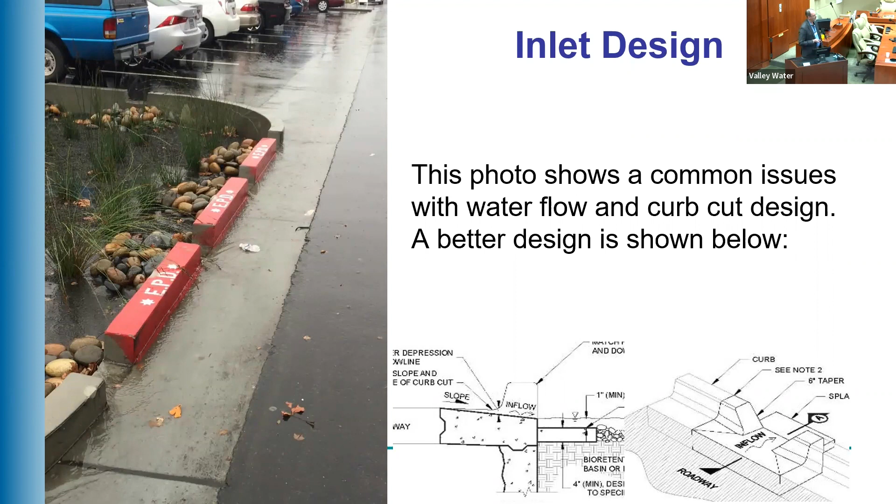So now I'm going to talk about plant selection a little bit. And I did want to mention that I've been working with Valley Water, Ashley at Valley Water, to talk about what are the best types of plants. We're also working on a vegetation guide for bioretention systems, a maintenance guide. So there's a lot happening in this area, but this part is going to be about design.

And when you're selecting your plants, these are a bunch of different things to take into consideration. I'm not going to go through all of them because we don't have as much time, but there's a bunch of good reasons or criteria that you want to look at. The types of plants also have these aspects to them.

They are deeper rooted is better. They're perennial plants; typically we're not using a lot of annual plants, just to keep the maintenance costs down. We want plants that can survive some inundation of water, but most of the time it's going to be dry and the soil is going to be drying out. So they've got to be plants that can handle that in these sandy, fast-draining soils.

We're trying to get more natives. People like to have some variety of plants, but as long as they're not invasives, then we generally say if they meet all these other criteria, they don't have to be native to California, but we do encourage that. And Ashley was reminding me that you also have to look at even more local plants, like what are the ecotypes of the plants that are maybe even more specific to your area, and working with nurseries that can provide those plants that are maybe even more specific to your region than just, say, a Juncus patens species or subspecies that could be anywhere in the state, but maybe in your region you have a more specific ecotype that you want to use.

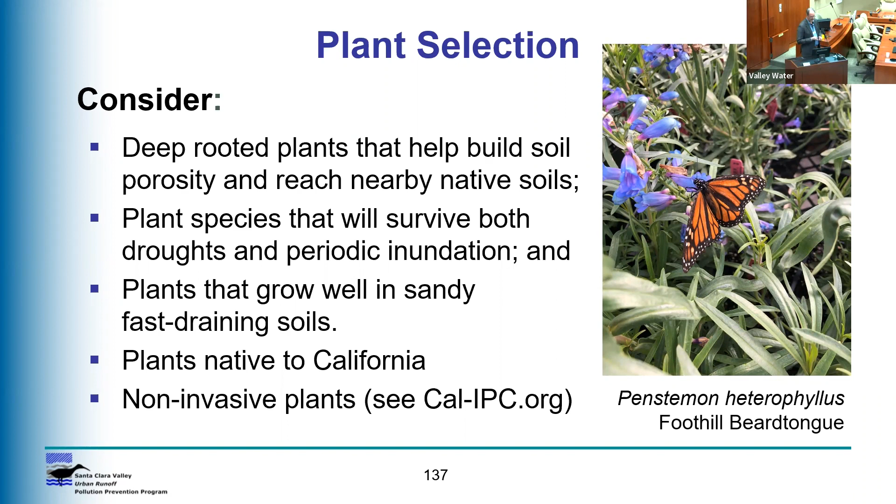We have a lot of plant lists in our guidance materials. You probably can't read that, and I don't expect you to, but you can go to these documents that I'll give you at the end. There are links to the documents where you can see some of these plant lists. As I mentioned, they're recommended plant lists. If a landscape architect or designer has another plant they think will work well, most jurisdictions will say, just give me the rationale why you want to use that plant, and if it sounds reasonable, they'll let you use it. But this is our kind of guidance list.

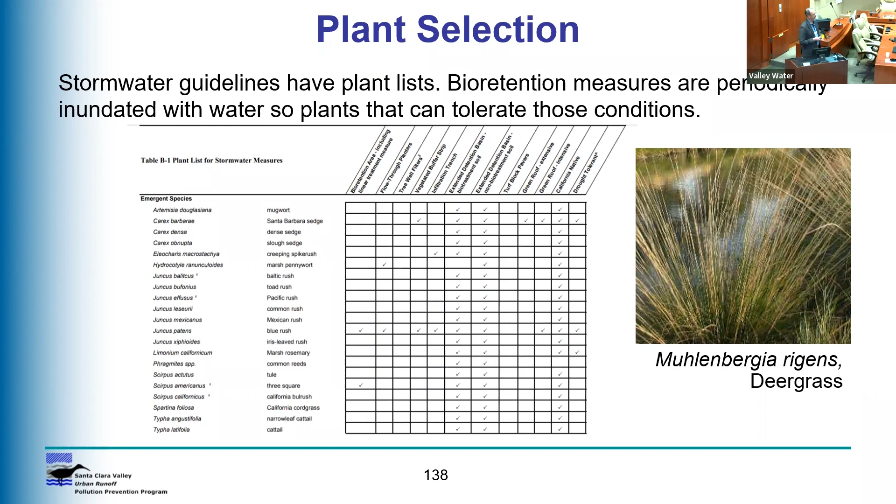The gray rush, Juncus patens, is probably the most frequently used. It tends to stay green even in the summer with low water, and it's very hardy. But there are some issues with it that I'll mention in the maintenance section.

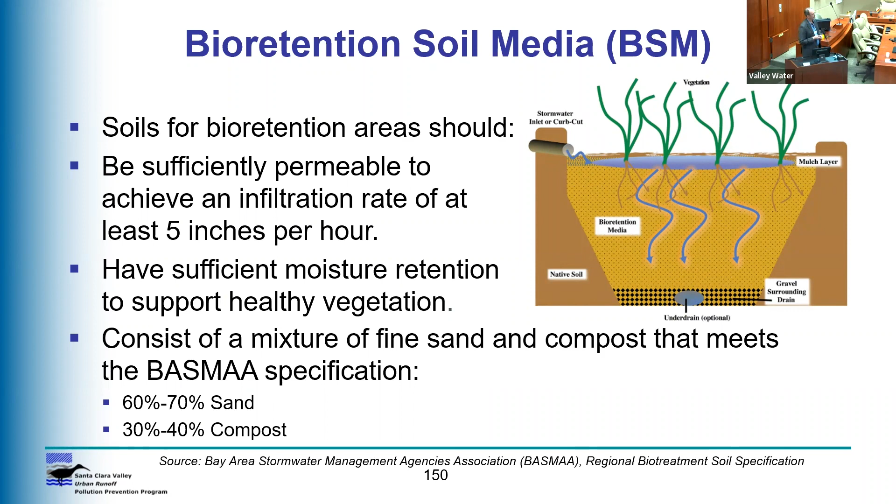So a little bit about the BSM. I've already mentioned a bunch of this, I think, but this summarizes the characteristics of this media. You can't just use any soil. Especially if it's a regulated project, regulated through the permit, you need to use this particular type of mixture. There is an alternative process you can go through if you want to experiment with something different - you can try using different additives, and it has a slightly different testing procedure for that. But this is the kind of standard that most people use, and there's a bunch of different suppliers for this around the Bay Area.

So now I'm going to talk about mulch. We have wood mulch and rock mulch. We see both being used, and sometimes a combination, and there's advantages and disadvantages for them. I was going to ask also about rock mulch and how it compares to wood mulch, especially with that 25% kind of water savings issue.

I'm in San Jose. The city really doesn't want to use rock mulch because they are concerned - and it makes sense what you were saying about the desert plants, that they would be used to that, but we're not really using, I don't think, typically the desert type plants in these bioretention systems. So they do respond better, I think, to the wood mulch, and the rock mulch can really heat up and cause problems. You could have a negative instead of a positive with the rock mulch in a hotter climate.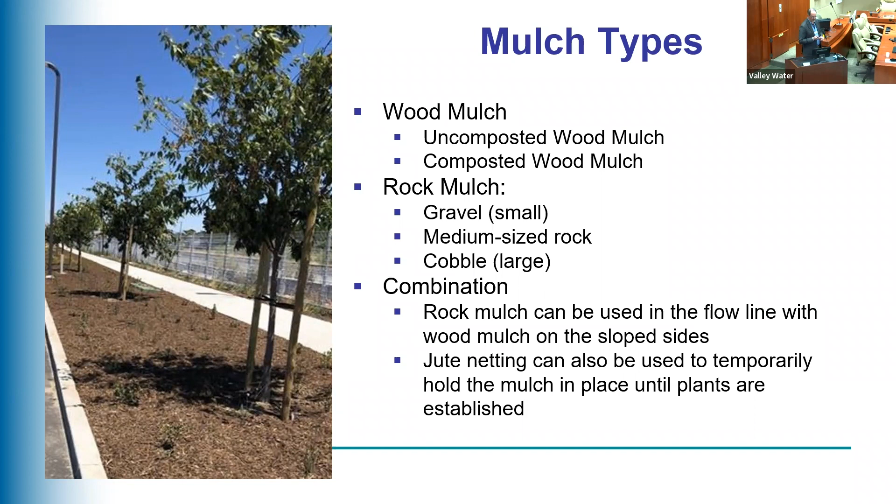So I wanted to just mention a few different aspects of mulch here, because it is a common question for bioretention systems where they're getting flooded with water, and then it can float and you lose the mulch, or it makes a big mess. So this is what maybe more typically has been used - an uncomposted wood mulch, or maybe a bark mulch.

What we're trying to get people to use more now is a composted wood mulch. It's maybe tree trimmings that have gone through a composting process. Arbor mulch is a name for tree trimmings, so composted arbor mulch or composted wood mulch, we think is a really promising development. There are some companies already selling this. They might call it bioretention mulch or composted wood mulch.

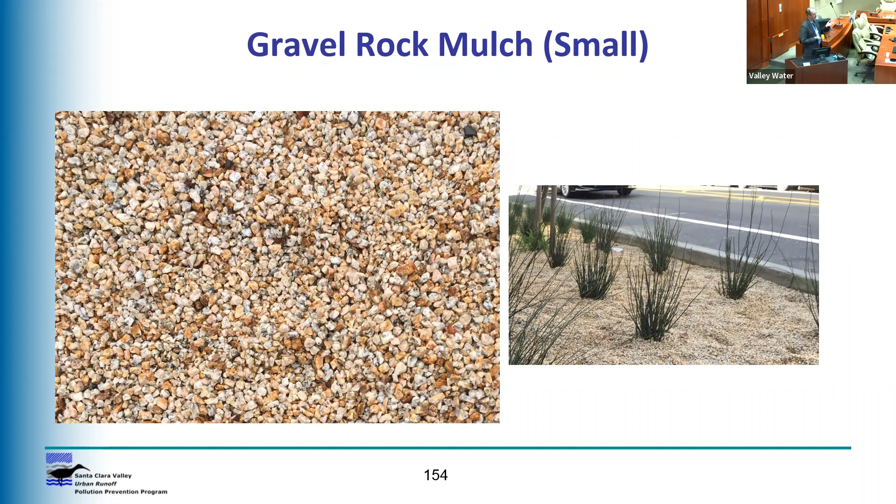Just to talk about the other types quickly, we have this small kind of gravel mulch, which can work well. Then you have medium and large size rock. This particular picture is from San Francisco, and they use a lot of rock mulch. Sometimes it's because it's a very small system and they didn't have enough space to put in a bigger bioretention area, so it would get blown out in a storm with wood mulch. So they use this rock mulch because it's undersized and they didn't really have a choice. Also, it's a milder climate there, so they're not as concerned about that heat issue.

They're also the only city in the Bay Area, or most of California, that's a combined storm sewer system, so they're actually going to be treating the water again later. This is really just to kind of hold it back for a little while so that their system doesn't get as overwhelmed during a big storm. So they've got a bunch of different criteria to look at in San Francisco.

But we do see this dry creek bed look, which to me is not ideal. I'd rather see plants with wood mulch in most cases. Sometimes you'll see a dry creek bed as a way to convey the water from one place to another. That's good, but what I find with these kind of systems is that they're difficult to maintain, because if the weeds are growing up in there or you get sediment in there, you got to move all that rock out of the way, and it's a pain in the neck, literally, to move it all.

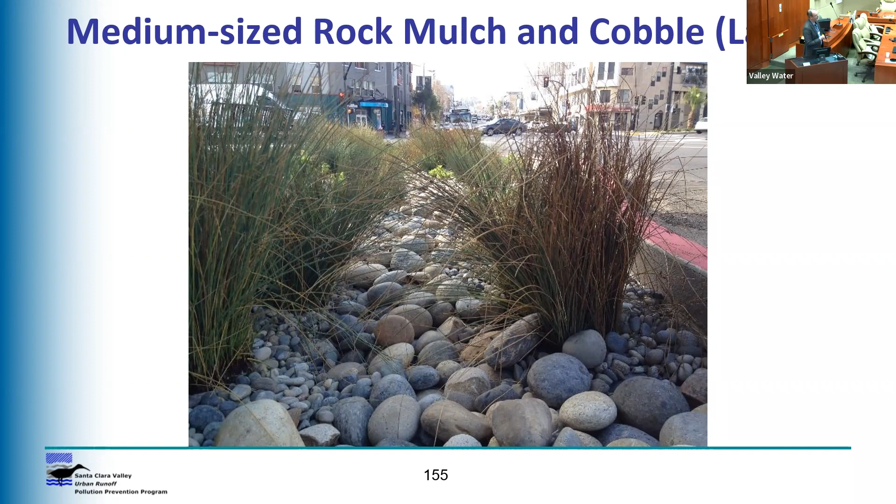There's even a maintenance guide that shows the maintenance people pulling the rock out and piling them up on the side of the system and then having to put it all back. So I think the wood mulch has a lot of advantages over rock mulch if you can do it. Here's an example of a hybrid system where in the flow line you have the rock and gravel, and on the sides you have the wood mulch.

I'm not going to go through all these, but needless to say, when you start really diving into the topic of mulch, there's a lot to think about, and I'm going to show you just some of these things. But the worst type of mulch, if I were to summarize this, is the micro bark, where it's all the same size of little bits of bark, and bark floats a lot since it's all the same size. So it tends to really float and move and go down that overflow or make a big mess. And the best, we think, is this composted arbor mulch or composted wood mulch.

So there's a lot of benefits to composted wood mulch. Some of the newer ones relate to SB 1383, if people have heard about that. It's about keeping organic material out of the landfill, so cities and counties have to purchase a lot of composted mulch and use it. Composted wood mulch actually gives you a lot more credit towards that procurement requirement that they have to comply with. I think this is actually the first year that they have to start complying with that requirement to purchase a lot of mulch and compost.

Also, it floats less, it's less flammable. It reduces pathogens that might be in the raw material after it goes through the composting process, gets rid of a lot of those pathogens like sudden oak death. So there's a lot of advantages to it.

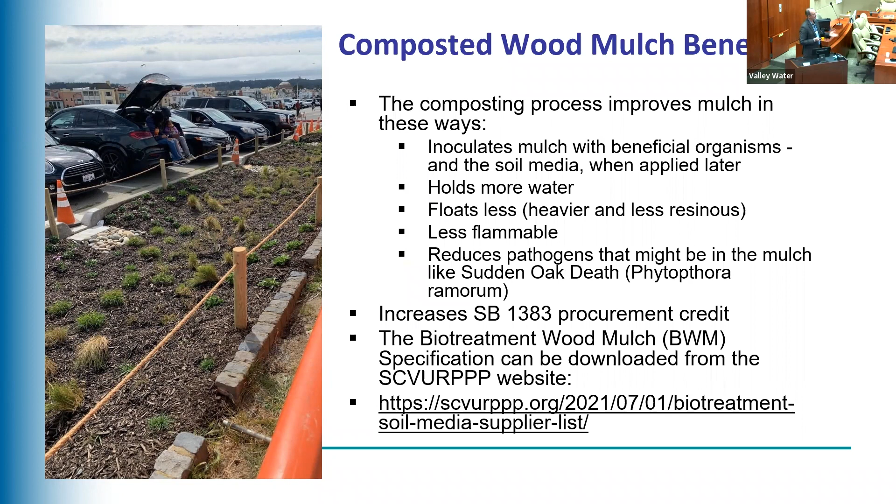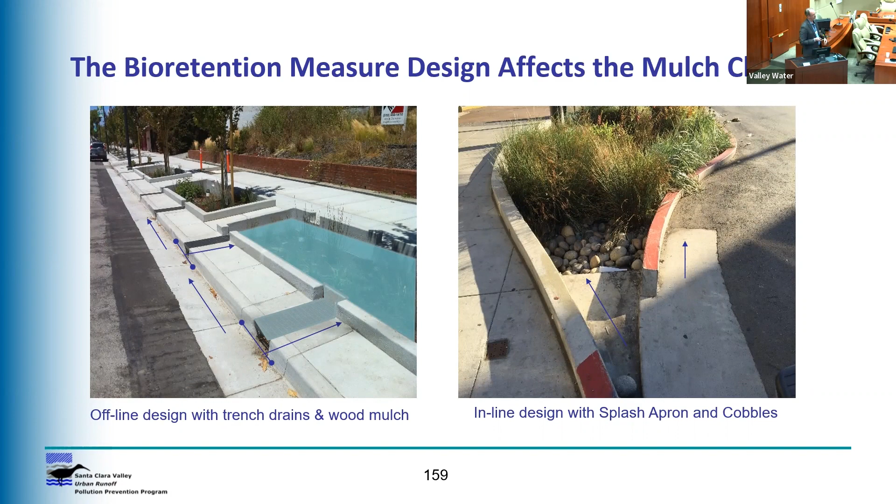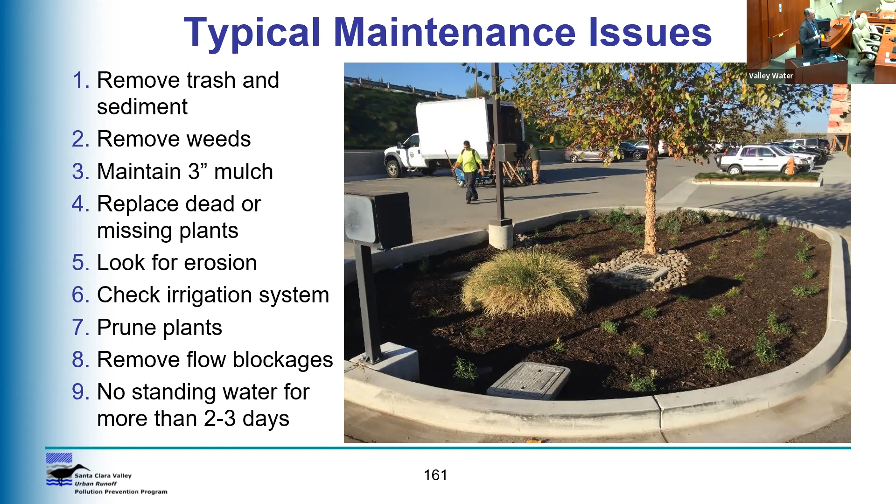Okay, so I'm running out of time, but we have some typical maintenance issues. These are a bunch of different examples. The system on the right here, they took out some of the dead plants and replaced the compost layer, putting a fresh layer on top to replace what might have decomposed below. Fresh mulch, checked the irrigation system, did some pruning, removed trash that might have been in there.

This is an example from San Jose's maintenance guide, so I encourage you to look at that. I've got a link to it at the end of the presentation.

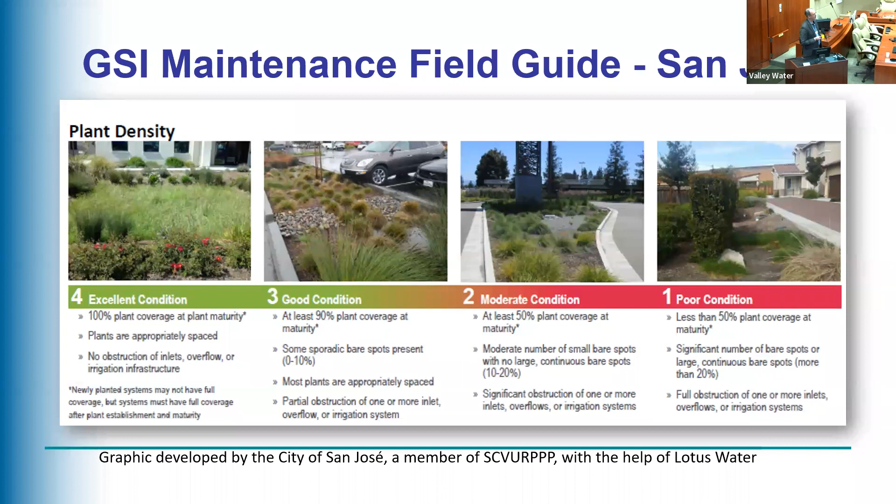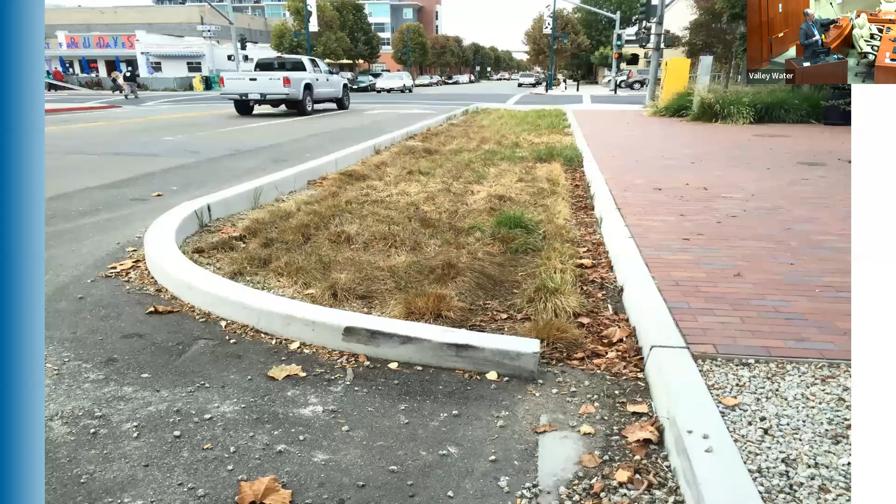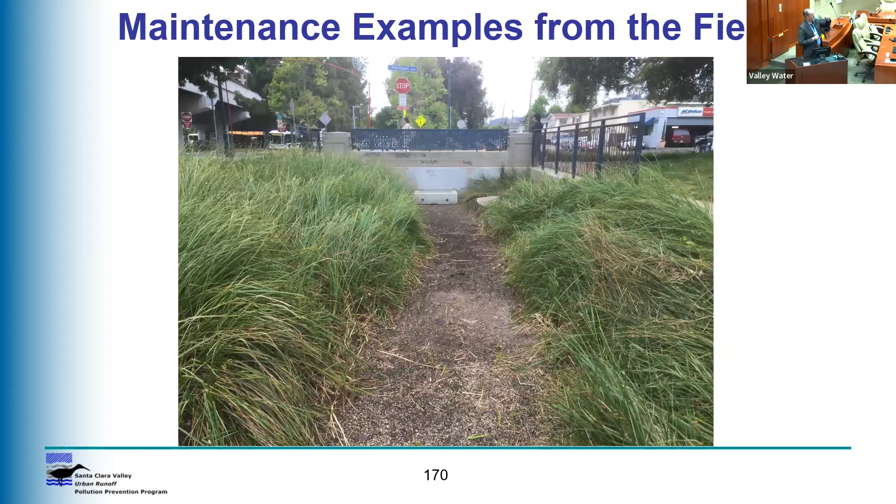Here, the plants - that's the overflow drain in the back there, you can't even really see it well. The plants are kind of overgrown, so they cut back and pruned some of it, but then didn't put fresh mulch in. So that would be a recommendation for that.

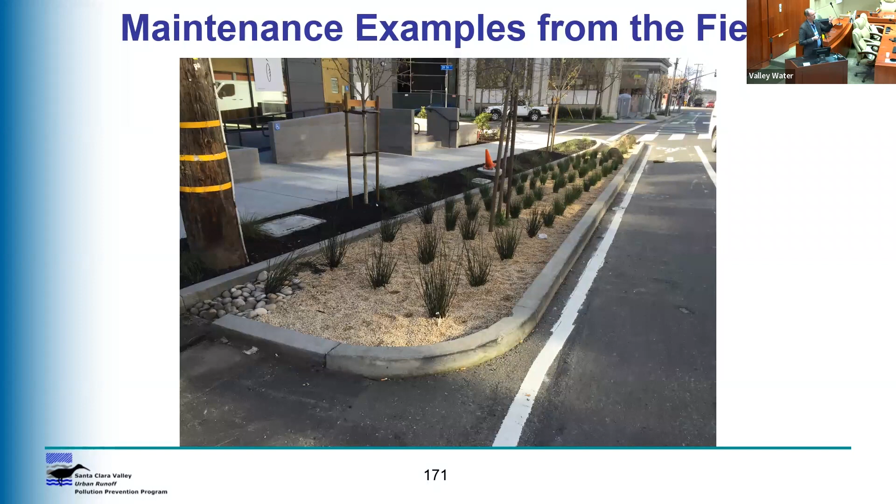This one is actually one of the most important things, I think - to know the plant that you have. That's what our vegetation guide is going to talk about. This particular planting has a lot of rushes in it, and they came in and trimmed them all down to a ball shape, which might be typical for a bunch grass or fine to do with a lomandra or deer grass. Those plants typically respond well to severe pruning, but rushes don't, and a lot of times they will die if you prune them into that ball shape. So we're trying to get people to recognize the plants better with this vegetation guide we're coming out with.